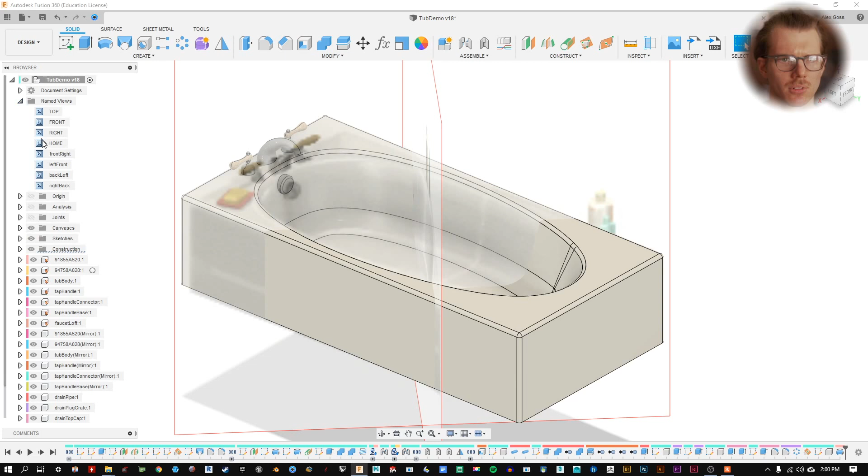Today we're going to think about a few finishing touches for our tub. First thing I want us to do is check out our canvases and just kind of see where we're at. I'm going to open my named views, go to our left front, and I'm going to hide the tub just so we can get a better picture of what's going on. Okay.

There we go. So one thing I'm thinking about is this softened edge. It's really an aesthetic detail, but I want us to think about ways we can do that. And there's not a lot of detail here. I think there's some room for interpretation. And then what we're also going to think about is the function of our tub. This is going to be filled with water.

Even if it's cast iron, it seems a little dubious, especially as we start to work on the aesthetics of these walls. We're going to remove some material here probably. So rather than thickening things, we also want to think about how we can use a little bit of material and then brace this. Now, that might be overkill. Tubs probably aren't necessarily like this. But if you're thinking about hollow, thin-walled projects, it's a feature we can play with, and we'll have a very robust cast iron tub.

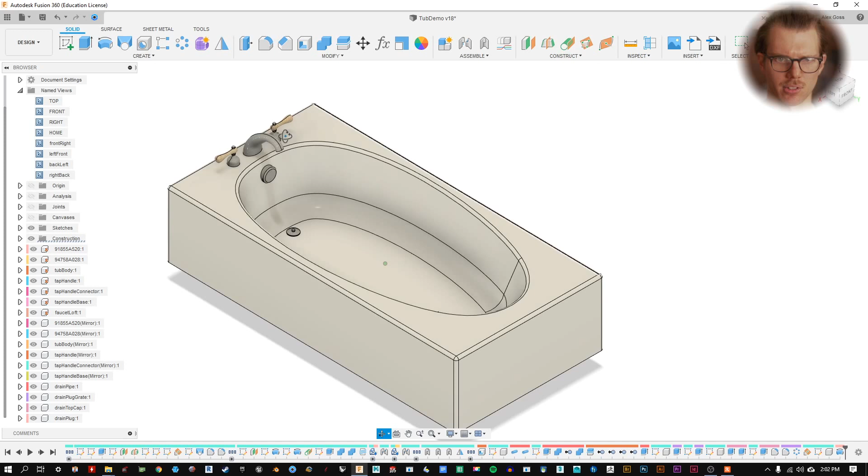And we'll do some filleting, finish that side out, finish the top side, just make sure everything's looking how we want it. And then we're going to talk more about joints. So mechanical joints that we want to focus on at least are our handles, maybe the stopper. I went ahead and finished the stopper after we parted ways last time. We ended about here.

And I just made a simple revolve based on just looking at a stopper. There's a little hand grip there. Pretending that this is the gasket, the rubber part that compresses down. Nothing super realistic. I made them all one body. So not a big deal. We could change that material. Maybe we could just apply that to the face. Doesn't want to do that very well. Well, another reason we could separate it into its own body. We'll go back to our brushed. That's fine. We can pretend it's a gasket, or you could make it its own body

or its own component. When we do joints too, we're going to talk a little bit about how we can simplify our browser tree here. We've got so many different pieces. It might be helpful to have a way to organize it, especially these McMaster components we imported are just part numbers, which is meaningful if we were to reference those back in the McMaster catalog if we were purchasing these parts. But as far as the design of this thing, it's really hard to remember. Is that a nut? Is that a bolt? Which bolt is it?

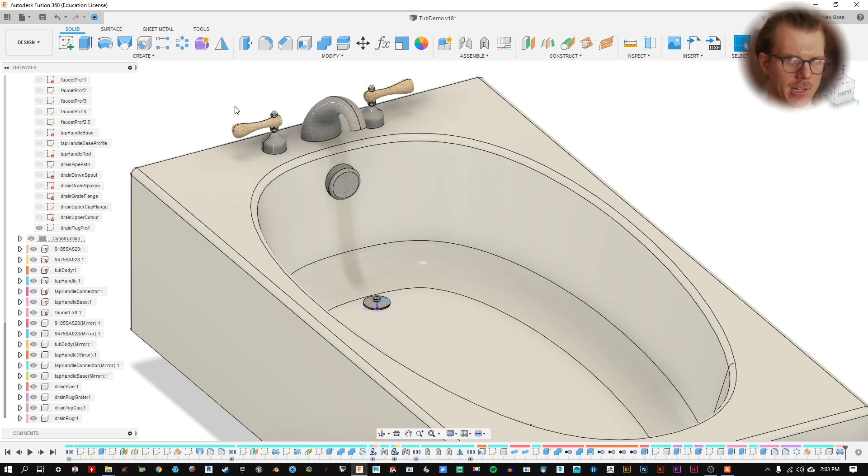Rather than renaming it, we're going to place it closer to its assembly. We're going to think about this whole group here when we work on the tap handle as a sub-assembly to the assembly of the whole tub. So let's get started. Let's open up our canvases, go to a view where you can see this swirly shape. Where the tub's obscuring it, you can hide it. In fact, we might want to hide pretty much everything right now. We're probably going to be cycling on and off the tub body as we start to carve into this. But right now, we just want to think about what we need to do.

I'm looking at this, and it's kind of a wave-like pattern. It starts low, it wiggles, and it gets a little higher up on this side. So let's start with a sketch and just sketch this out, feel what it's going to look like. And then maybe we can think about ways we can turn that into a feature. Just want to make sure my typing is working. Great. So we can keep our canvases on. We're going to need them in a second.

I brought the tub body back so we can see it because we want to create a sketch on this face. So create sketch, click on the face of the tub. I'm going to immediately hide the tub because it's blocking so much of our canvas as it protrudes through. I'm going to start with a fit point spline rather than a control point spline. Just to review, control point spline gives us slightly different options. We want the abilities that fit point spline can do. Again, I'm going to try to shoot for as few points as possible.

And then rather than trying to remember if it's enter or escape to end that line, I'm going to have you just press that check mark because I don't want to confuse y'all. And then when we finish the spline and it is sitting there, we can definitely hit escape to end that command because we're done with it.

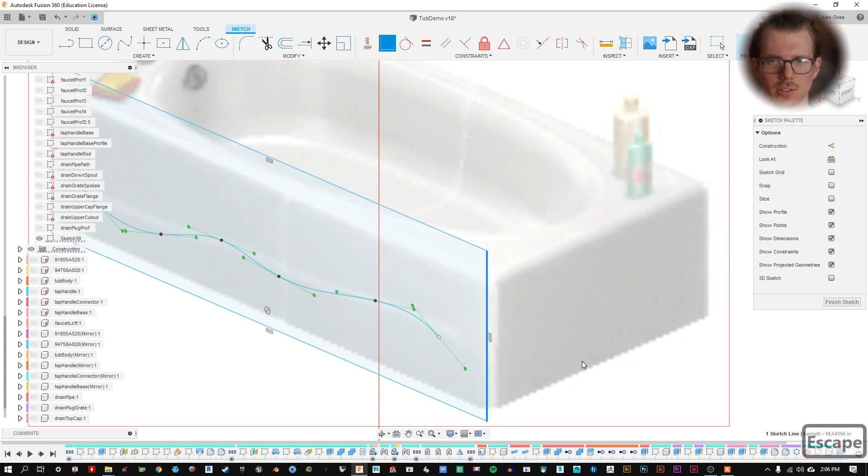Okay, next thing I want to do is I'm going to draw a rectangle just kind of around our spline. And then I'm going to make the ends of the spline coincident to these ends, not walls yet. So make sure I have nothing selected. Coincident, this point, that line, this point, that line. Depending on what you select first, one piece might move to the other piece. Sometimes little decisions are made without us knowing.

Now we want to try to avoid sharp curves. I'm not going to worry too much yet about if our sketch is tangent, meaning if this spline flows perfectly into that rectangle. It'd probably be a nice thing. We can go ahead and try it. This is an example of if we think about what tangency means.

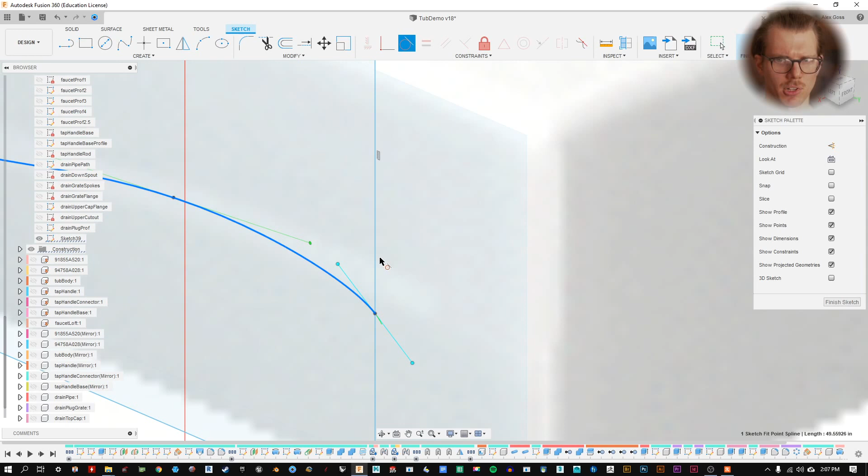Right now, this spline is intersecting, or about to intersect, this vertical, and it could either be tangent this direction or this direction. So if we hit escape, have nothing selected, and we click tangent, click on the spline, click on the line, it's probably going to want to dive that way, and then we're getting this sharp corner because we're thinking about this part of the profile as the part of interest.

So if you're getting that problem, it's probably best to position it close to how you want it, and then do that command, and then it's going to go tangent the other way. Now let's say you do have your spline up like this, and you make it tangent. Can you fix it? You could delete that. Say you didn't notice it at first and you come back.

You could always come and hunt for the little icon. Just be really careful where you click on it, make sure you're not clicking on anything else. And then you could hit delete to release that. Or maybe if we click on the endpoint there, you can grab this handle and we can slide it down the other way. So you're not in the weeds necessarily.

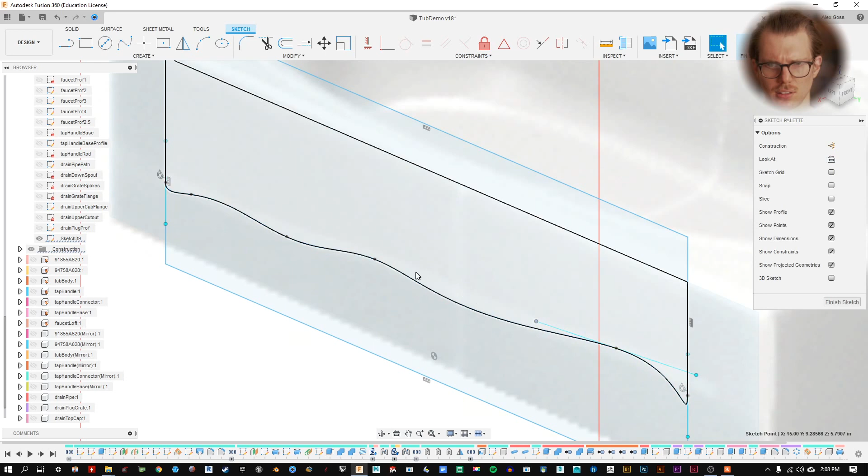So this is open to some interpretation. This is probably an opportunity to just try some things out. Nothing is really sacred here as far as what's right or wrong. This is an aesthetic part of the whole thing and it's not going to necessarily be perfect, as we've seen with the rest of the project, but maybe we figure that out.

It's going to be still kind of a tight turn, so maybe we push this over some more. Bring that up. Maybe this comes out some more. I'm trying to see kind of where that shadow rests. I'm not going to worry too much about this edge being symmetric to this edge. This might not be a symmetric feature. I mean, it already is this kind of amorphous wiggly bit.

So if the distance between here and the end of the tub, and the distance between here and the end of the tub aren't the same, I'm not going to worry about it. You could make those even if you want, but I think it's okay. You could also further constrain this sketch if you so desired.

Speaking of which, let's think about what we really want to accomplish here. This top part is going to be our profile, but we're also going to need a bit that extends above. So really we're interested in both of these.

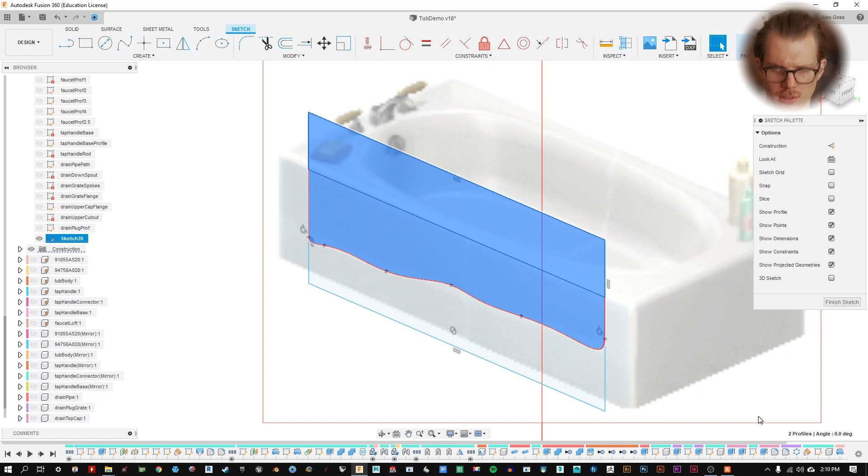And because we were building this on the side of our tub, we're getting this profile built in, this bottom edge of the fillet. We're getting that profile built in because the construction plane we used was the side of the tub, so it's going to use what available edges it has. So we'll have these two.

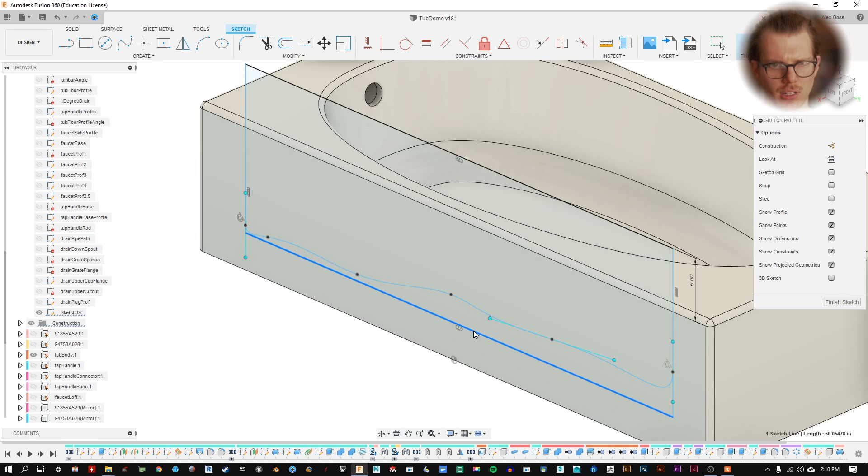The height of this isn't super critical, but we want to make sure it's above this to some degree. I'm just going to give it some dimension. Now this bottom edge is going to be a reference tool. This is going to be kind of our pivot point, the way we're going to end up extruding this out. We want this to be clearly identifying how far we are when we make our pivot.

We're going to think about it in another direction. So we could, let's see if Fusion will let us do a tangency command. I think it won't between these two, this spline and this line, because they're not sharing any points right now. The problem with asking Fusion to make this tangent to this is that there's so many options right now. Because this is a fluid spline with all these different kind of points, it's not really regular. It's not a repeating pattern. Fusion can't decide, do you mean tangent to here or here, anywhere along this. So we would need some kind of connection to that line to limit that.

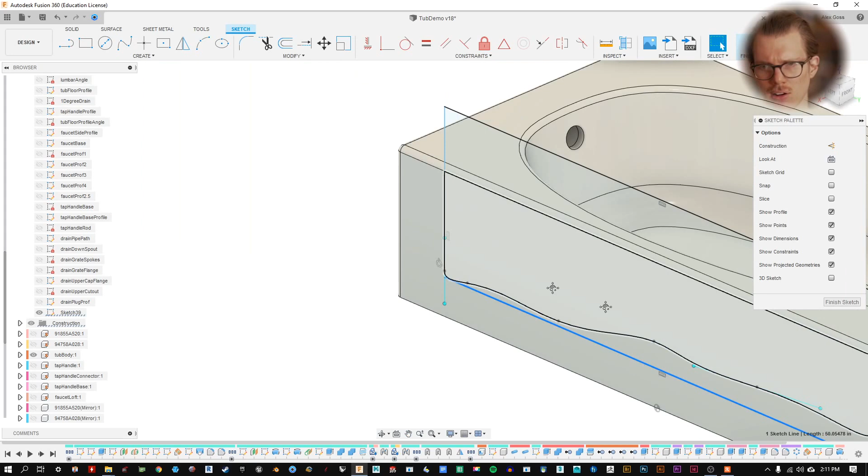I like the way that looks. I'm going to keep that line just kind of where the lowest part of our spline drops to. And I'm editing all of this in this isometric view that we grabbed for our named view, just because I want it to reference the picture. Let's go ahead and finish that sketch. And let's label it, because we're going to be jumping between sketches a lot. Let's call this vertical, because right now it's just on that vertical plane. We're going to tilt it over in a bit.

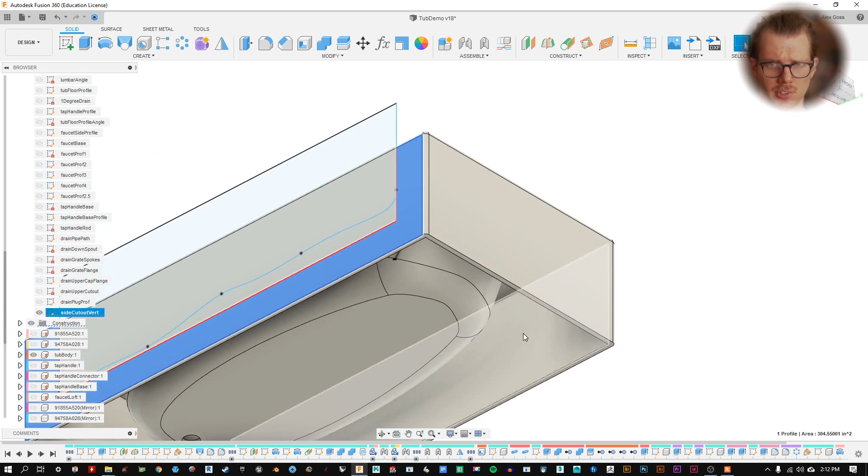Let's make a new construction plane. What I want is a parametric plane, meaning it's going to reference actual features, not just fixed dimensions or arbitrary placements. We've done this before, but we're going to do a new plane between the inside wall of the tub and the outside wall of the tub. This is going to make sure we don't cut too far into the wall of our tub. And if we change that thickness later, it will adjust automatically.

So we're going to start with a midplane, construct midplane. You can click in any order on the inside and the outside of the tub, and there's our midplane. If we look at it closely, we can see it's dividing even that fillet in half. Great. We're going to hit OK. And now we're going to start a sketch on that plane. You can either click on it first, pre-select, or go up to create sketch, then select that plane. Just make sure you are hovering somewhere over that orange bit.

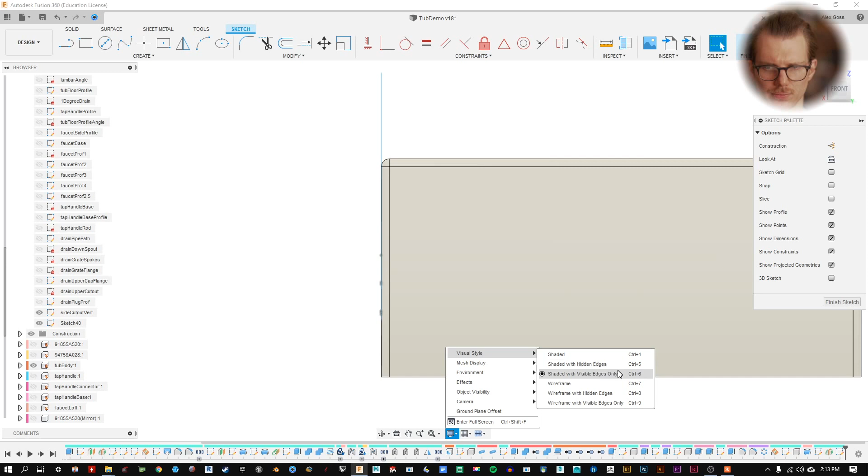That's another reason why I like creating a midplane, even when it seems like you don't need it. It gives us a nice ability to grab at the edges and not have to guess, are we clicking that plane or that plane? So now we're sketching inside of that wall. Let's look down the side of our sketch and change this to wireframe. I'm going to project this bottom line. I'm going to hit P on the keyboard and hit OK. And now we've got this point.

Remember I said this was going to be a pivot. This is going to make sure that the furthest our cut goes is to that depth. And then I'm going to make sure we end up with a nice blend into this top fillet. We're not going to cut into it, and we're not going to cut too far where it's a sharp edge. We're avoiding sharp edges. I'm going to start a line command, starting on that point, and, oh, I'm doing this in the wrong order. Okay, we'll come back to this sketch.

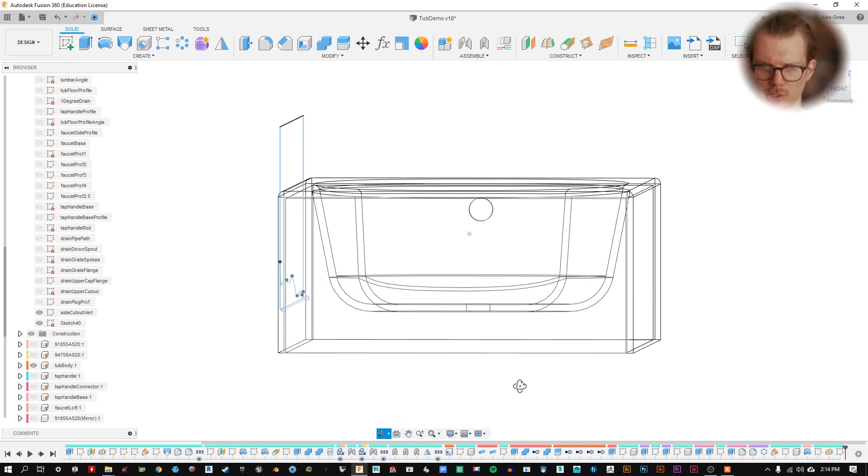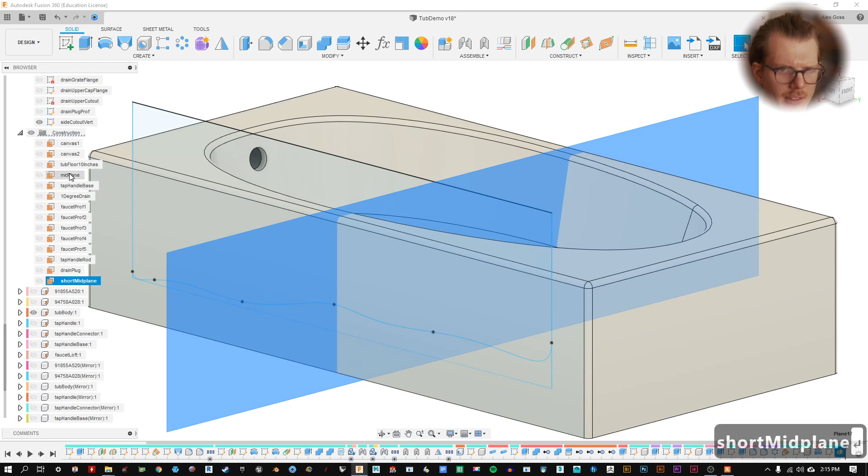So what we should have done, let's roll back a little bit. We don't need that sketch. Let's see, what was the midplane for? Just trying to retrace my steps. Okay, right. The midplane's supposed to go the other way, excuse me. So let's double click on that. And instead of those outside and inside edges, let's make a midplane. We could use the origin, but as I said, let's just make a midplane so it's clear. I'm going to call it short midplane. Make sure that's visible. We'll need it.

Let's start a sketch here. And now we do need to think about the wall thickness, but in a slightly different way. So let's go back to visual style wireframe. We want to find out what the center line is here. We're looking down the side now because we're eventually going to create an angle that looks something like this. I'm just exaggerating it right now. It's not precise, but we'll work on that. So I'm going to delete that. We don't need that line yet. We're going to do something similar to what we did with that midplane, looking at this inside and outside edge. I'll go back to shaded mode.

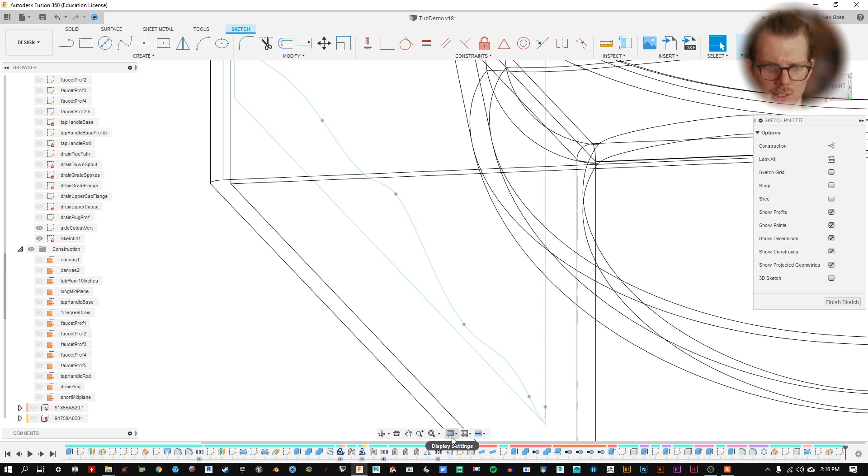So I'm going to project some geometry, hit P on the keyboard. I'm going to grab the inside wall and the outside wall, like what we did with the midplane, but different, and hit OK. I'm going to go back to wireframe, look down the side. That looks right. And what I want to do now is I'm going to draw a little tiny line between these two. So now we've established this thickness.

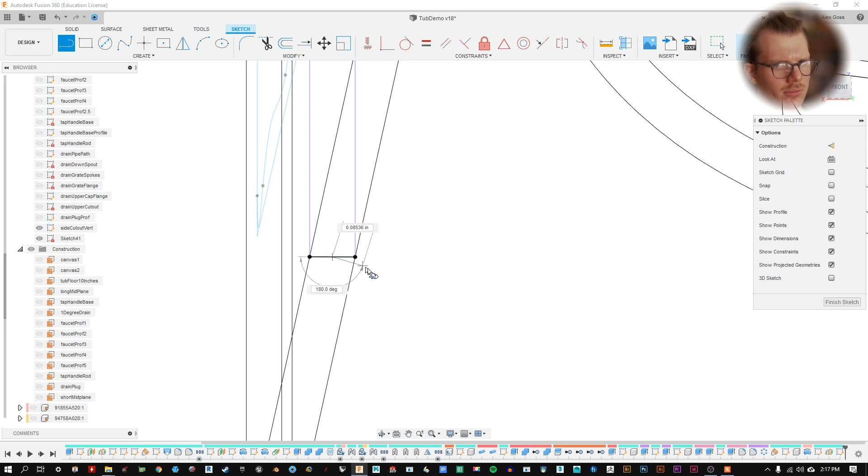And I'm going to draw a center line. And if you don't see that constraint, what I'm doing is I'm starting a new line by pressing L. And I'm going to hover over near that midpoint until it snaps. I get that triangle constraint built in. Okay, I'm going to draw that somewhere up near the top. Doesn't have to be really too far. We can constrain it in a moment. And I'm going to make everything I just drew construction geometry.

Okay, if it's looking muddy with that tub, we can hide it because we've got all the information we need from the tub. And let's make everything here construction by just, with a marquee, grabbing it all and click construction. Okay, this is going to be unconstrained for the moment. But what we're going to do now is find where this point and this point will meet.

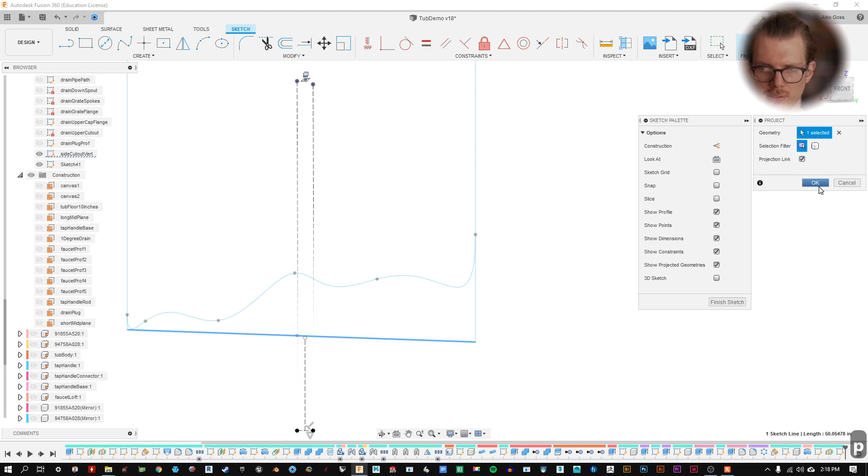So this point is the bottom of our rectangle that we drew as a boundary. So we can hit P on the keyboard and select that bottom line, hit OK. It's just going to give us a point where that intersects our verticals, the outside wall. And let's draw a line between those two. So what we're about to constrain is that height. So projecting that just into the center of this tub so we know where to start in our up and down.

And let's make this horizontal vertical, or you could make it perpendicular. Show you that again. We could make this line horizontal vertical. I like perpendicular because it's really talking about the drawing itself, not so much relationship to like the origin or what's up or what's down. And let's make this also construction. So select it, construction. Looks like you have to select it first. Okay, now we just connect the dots.

We're looking for the connection between this point and all the way up here. This point, if we bring our tub back, this is where we want that cut to pass through, to pass beyond. So let's do that. Let's create a new line. You can start either direction, 1 and 2. Looks like I'm still in construction mode, so we can hit escape, select that line, and just hit construction again. It'll switch it to feature geometry.

Okay, so all of that was to create a plane. We're going to create an angled plane based on that sketch. So if you want to, you could go back to Visual Style, Shaded, or Control-6 on the keyboard. Okay, we've got two sketches visible. This is our angled sketch, and then our profile that we're going to cut out eventually.

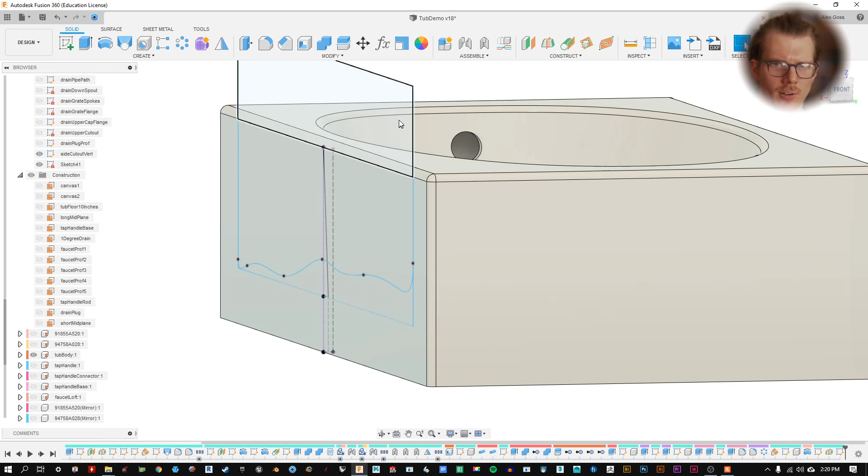So to construction, plane at angle, and we're going to find that line that we just drew, that connect-the-dot line. And we want to make sure that angle is set to 0 degrees because we want to reference that angle and nothing else.

So that angle is really just determined by the length here, this leg of the triangle, and then this leg of the triangle from the tip to where the bottom of our spline ends, and then to the center of the thickness of the tub, which is parametric. So if we scale it, it should scale like I was talking about with the midplane. We did something kind of similar here. So it's parametric. We're always looking for ways where we can tie things to the meaning of the drawing.

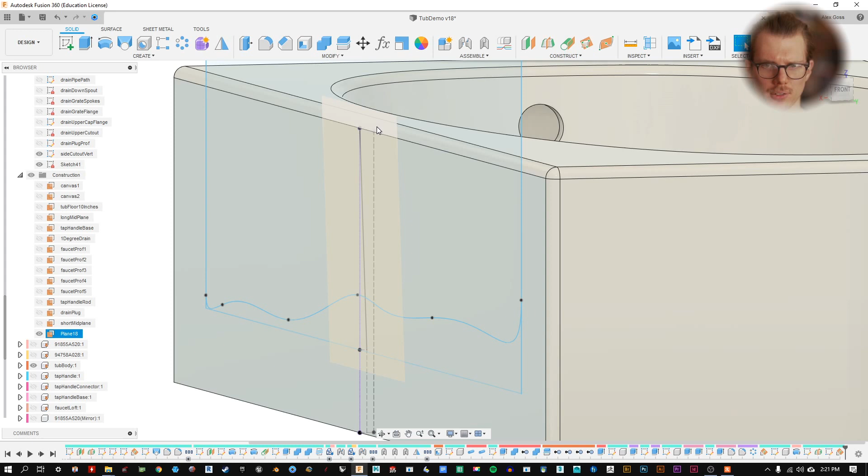Okay, we have a new construction plane. We want to take this construction plane and project our sketch on it. Before we do, let's just look and see what we already have. We kind of want this to go halfway through. So we can do 5/8 divided by 2, halfway through, and then make that negative, so we're cutting.

So right now with no angle, it kind of looks like that. So we've got all these sharp edges. We could fillet that, of course, but we've got just kind of extra bits, even if we fillet that, if we want to look at that.

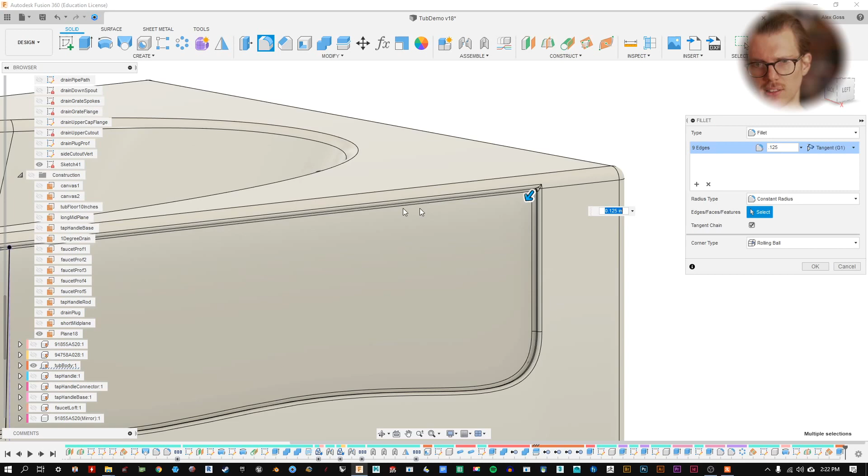Okay, I think that's not maybe the most sightly thing we could accomplish. Like this, I don't know, something about it also doesn't seem as hygienic. This is probably going to get wet; we don't want water to collect underneath here, or condensate. Just thinking out loud. So we're going to project that at an angle, so anything that drains will just drain straight off and not hang underneath the lip, avoiding a lip.

So let's undo that extrude, or just delete it rather. And since we have our angled plane, let's bring our construction plane back. We're going to create a new sketch. Click on that plane. And then we're going to make sure we can see our side cutout vertical. And let's project it. So we can hit P on the keyboard, or you can go to Create, Project Include.

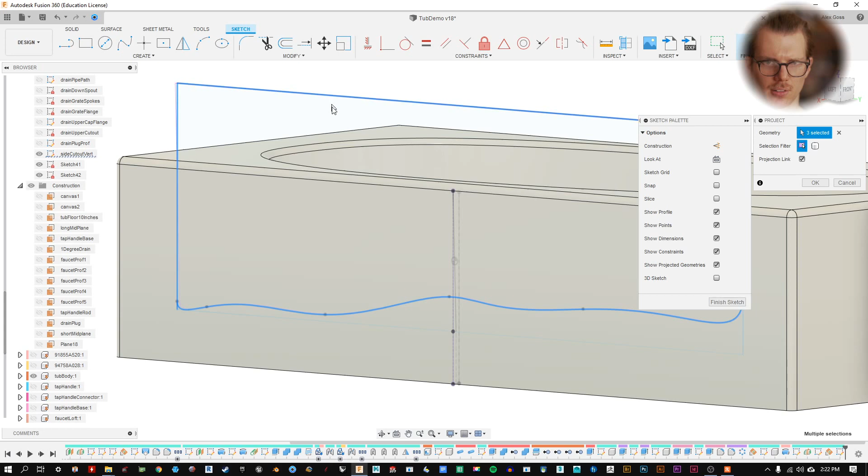And I'm going to take this part, and this part, and this part. We don't need that bottom edge. We could have made that construction geometry. That probably would have communicated that. But there we've got our profile. And we can hit OK, and we can finish that sketch.

So let's clean things up a little bit. I've got my cutout angle plane. You can hide that. Our side cutout vertical, we can hide that. Now we've got side cutout angle. And if we look at it, it should give us kind of a preview of what's going on. So we're really only taking a sliver away. Let's go ahead and do it.

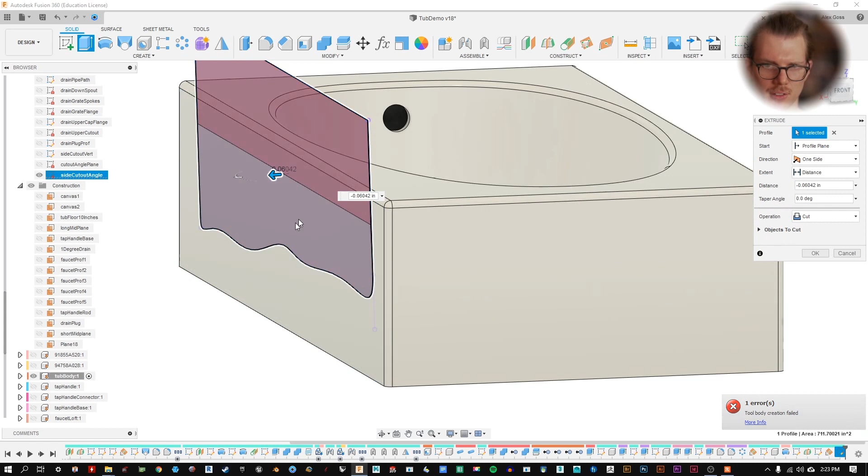So start with an extrude command, and just click that handle and you can pull it out anywhere. Now, we can't really get a good parametric extent here if we make this To Object. I haven't had luck with having it go outside, even if I change the chain faces command. So you're just gonna have to think about distance and just make sure it goes far enough. Okay, you don't want it too short.

So I'm just coming up with a dimension. 1 inch will probably always be okay for however much we change that wall thickness, where it's never gonna be thicker than that. Okay, and there that is. That's kind of a little more elegant of a shape. Now, we've been talking about water collecting, and sharp edges, we want to remove that. So right now we've got this sharp edge here and this sharp edge. We also want this corner to blend nicely.

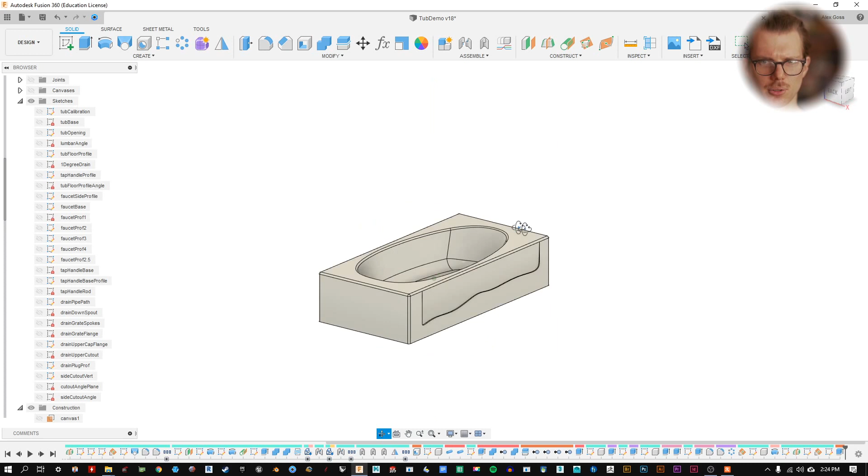Before we do that, we want to think about, from our canvases, this has got that feature on both sides, which maybe isn't realistic for the tub. But maybe it gives you an option to orient it left or right facing. So let's pattern that. We can mirror it, but I want to try something new, kind of thinking outside the box, a way to kind of mix it up. We could mirror this and it would just be perfectly identical. This side would be on here and this shorter side would be over here.

Let's try something else. So let's go to circular pattern. If you don't see that up here, yours might be under Create, Pattern, Circular Pattern, and I've just pinned it to the toolbar because I use it often. And instead of pattern type components, let's go to features. For objects, select that last extrude we did. And our axis, we don't need to draw a new one, we can use our origin.

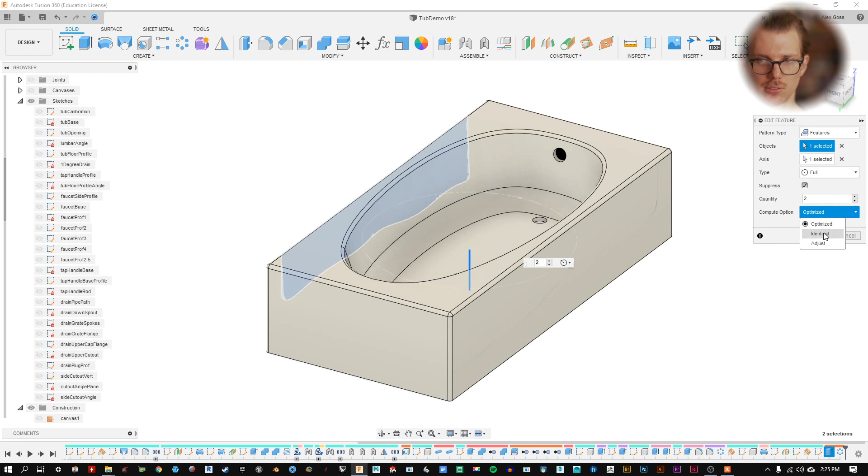Okay, it might look wacky at first. The default quantity is set to 3 right now on my machine. If I make that 2, you might not see anything. We can try some of these different patterns. It looks like optimized worked for me. Sometimes you get some failures when you try these things. There's another reason I didn't fillet it before. We could have softened those edges and then done this pattern, but I find that when you start to fillet things and then pattern them, things just get disconnected and kind of lost in that translation.

So now you can see the long edge is on this side, the short edge is here. So it just kind of makes it seem a little more organic without having to redraw it. So let's do our fillets. I'm gonna make sure I just have regular fillet. We can talk about rule fillet one day, but I think right now fillet's gonna be simpler for what we need to do. And I'm just gonna select these 2 edges.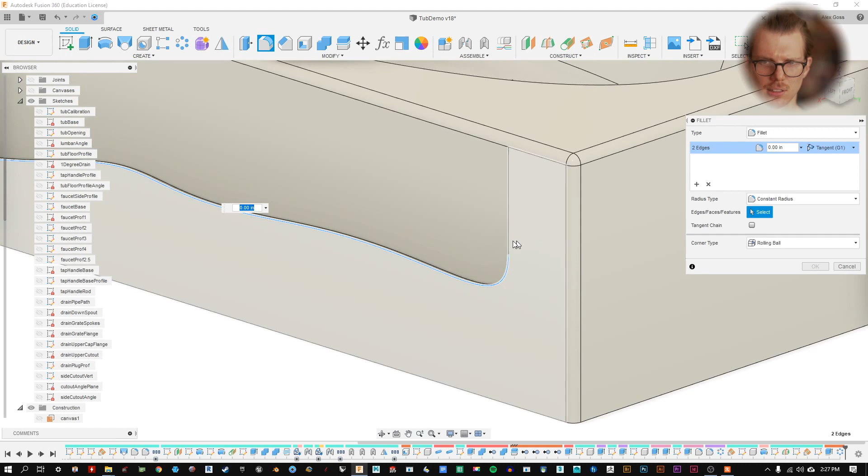I have this tangent chain selected. That lets me just click anywhere on this edge and it's going to find anywhere it's tangent and automatically connect it. So since we made our spline tangent when we started off, it automatically connected that. Otherwise, if we didn't have tangent chain selected, we'd come in here and we'd click, and we'd click. It's just more clicking. So if you hit tangent chain, it'll automatically grab that. And we should be able to do this in just 4 clicks.

This is one of the situations I would be careful grabbing this handle. Let's start off by just typing in some numbers. We know the thickness, or we know about how deep it is from here to here. That's gonna be half of 5/8. So we can say 5 divided by 8, divided by 4, I'm sorry. Okay, but that seems to work perfectly.

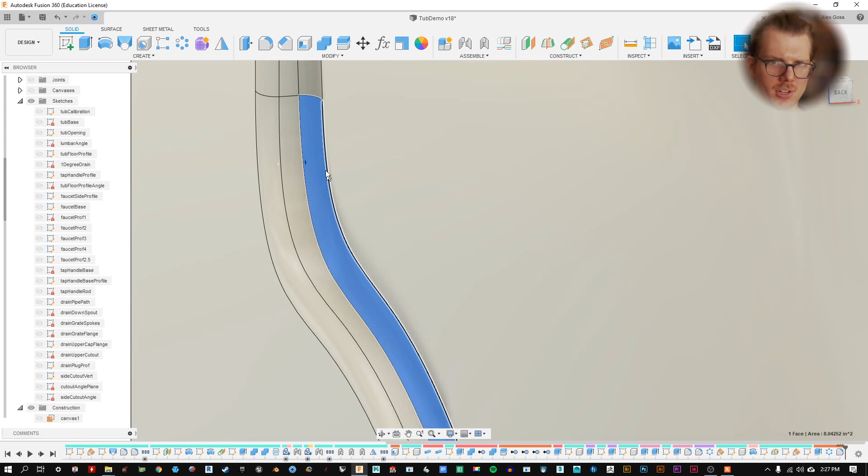If we made it smaller, which we certainly could, I don't even care what decimal it is, but let's just say we can make it 0.1. And we end up with a flat somewhere in here. So we're transitioning this concave fillet, and then we have this flat portion, and then we have this convex fillet.

I like to get away with as big of a fillet as possible, and I'm just thinking about how this was built. This isn't parametric the way we're typing it in. There's a way to do it, but it's kind of advanced. We'd be using our parameters up here where we can define certain things numerically. We can talk about that in a later video if folks are interested. But we've got fillets on both sides. That looks great.

Okay, let's look underneath the tub and let's think about reinforcing this. So under Create in our solid features, there's a couple of these features we haven't talked about. We've done some extruding, revolving, sweeping, lofting. We've even done thread, we may have done hole, and we've done some pipe. But we haven't looked at rib or web. They're very specific to the plastics industry.

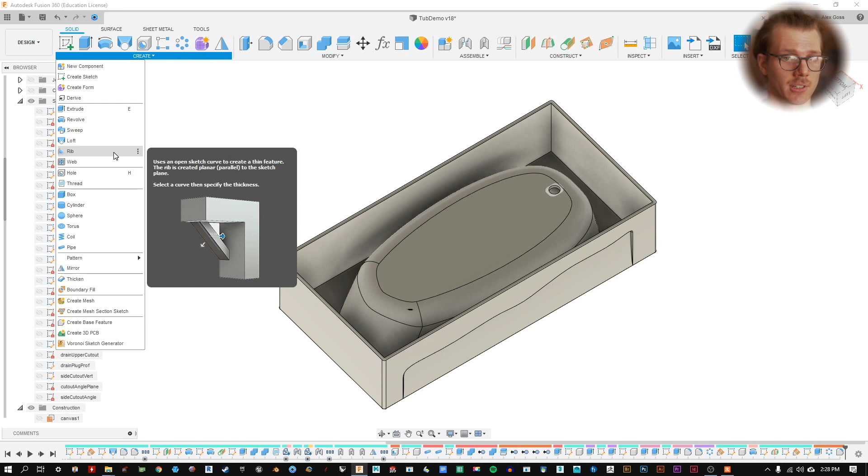If you look at a lot of things like a cover to a device, if it's plastic, it's probably injection molded, and it's probably got these ribs and webs underneath to keep that product thinner, so that when you cast it, you're not only using less material, but you don't get warpage or shrinkage as that material cools. If it's an even thickness everywhere, you get strength without making the thing solid. You save material and make a more precise form.

So rib is when you have these overhangs, create strength without making it solid. And a web is what we're thinking about today. We're going to add these ribs that go down the underside here. So what do we need to use this command? It's one of the simplest I can think of, and does a lot of things automatically. We could extrude some sketches, but I'm going to instead just create a sketch. I started that sketch just on the base here, not necessarily the origin, just in case things change.

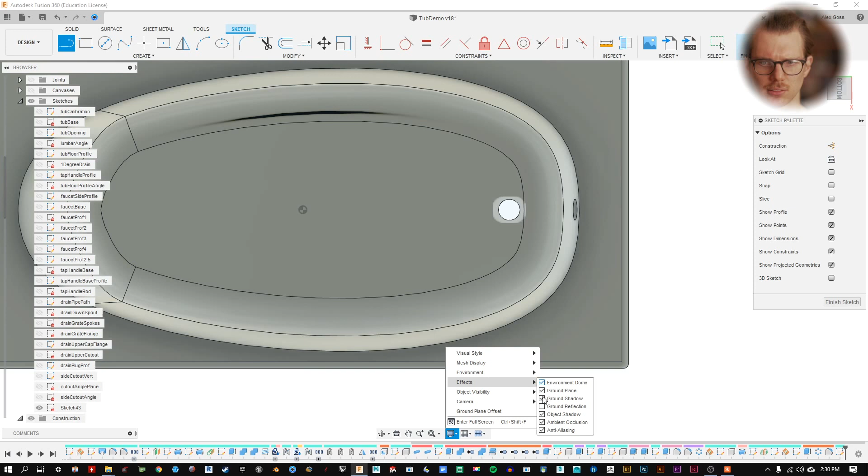I've clicked on that. Let's look at this straight on. Let's start our first rib, or first web. If you're having trouble seeing, I could turn off ambient occlusion, so we can see a little better down here. So we're still in our sketch. We've got our sketch palette active.

I'm going to start a new line, and draw it somewhere between there and there. I just want to make sure this is perpendicular. These two lines are parallel. It's going straight across. We don't want it blocking any of our plumbing, so we want it plenty far away from that side. Let's dimension this out. Let's call it an even 13 inches. Cool. I'm just going to draw one right now.

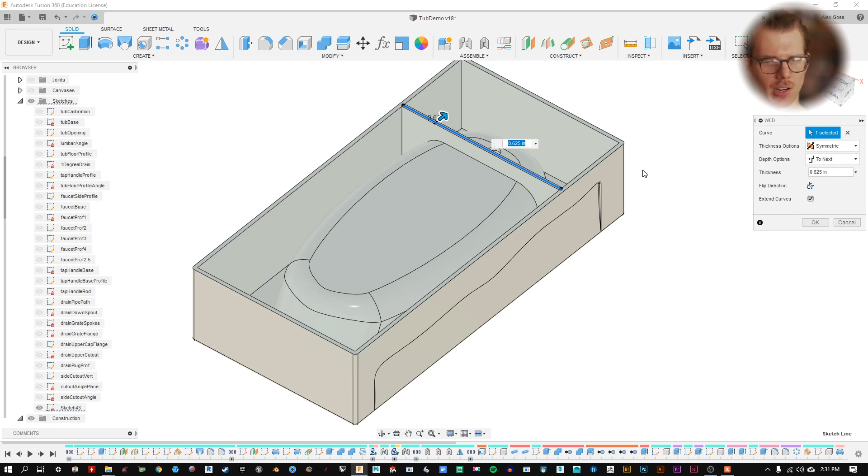Let's hit Finish Sketch, and go to Create, Web. I'm going to select this as the curve, and automatically it does a lot for us. It's very smart; it's meant to just do one thing. It's looking for where we started our sketch and the nearest object it can extrude towards. Now, did it go all the way through? No, it stopped before it went to the other side of the surface. So exactly what we need.

Let's make this the same thickness as our shelled tub, 5/8, and hit OK. And that's it. I'm going to save this. We've done some good work today.

And let's mirror this. Or rather than mirror, let's pattern it. So let's take features as our pattern type, find that web on the history. Our direction, we can set to this axis, but I'd rather do it off of the object itself. Just some line that's going this direction.

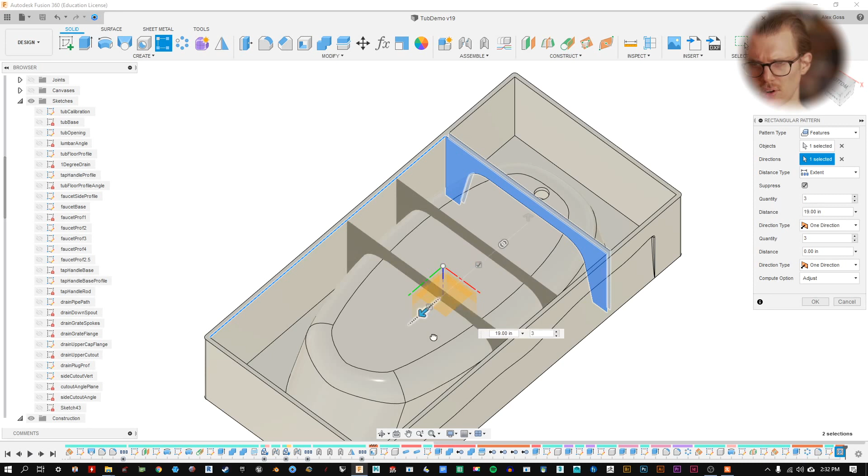And by default, it's going to start off with 3, and I can just click and drag to see how far those go. And you can set either the distance, how far from one object to the last object it goes, or you can change the spacing. So you can see with 3 objects, if we have a 30-inch total distance, there's 2 spaces between these objects, so they're 15 inches apart.

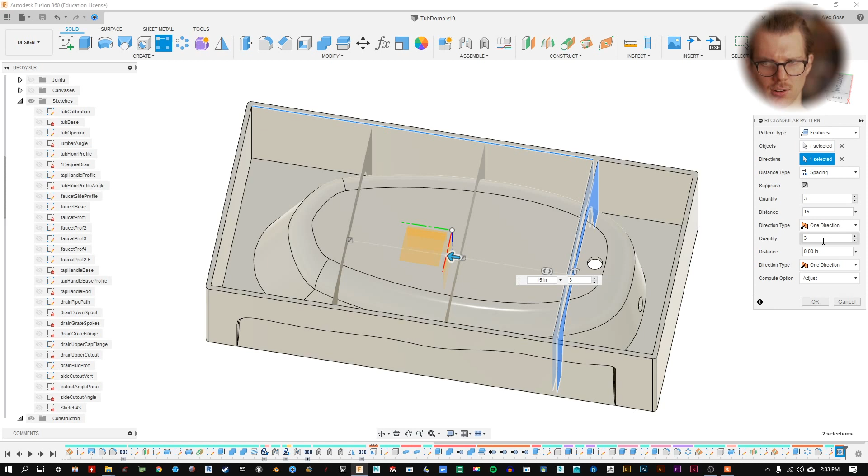We could change that to 13 just because that's an arbitrary number we used earlier. Let's go ahead and keep it 15. That seems pretty solid. And by default, it'll also give you quantity in the other direction. I found that you don't have to change this. It's not actually going to create 3 more things, but if you want to, you could just have 1. And we can hit OK. So there we have our ribs.

And we've talked about filleting the inside because if we're making a pattern for this, or as it's being cast, it's good to have soft edges there. So you could select all these edges if you wanted, not the face but the edges, and it would probably take you a while. But sometimes selecting the edges is a little more particular, a little more accurate, because you can really get what you want and not have extra bits.

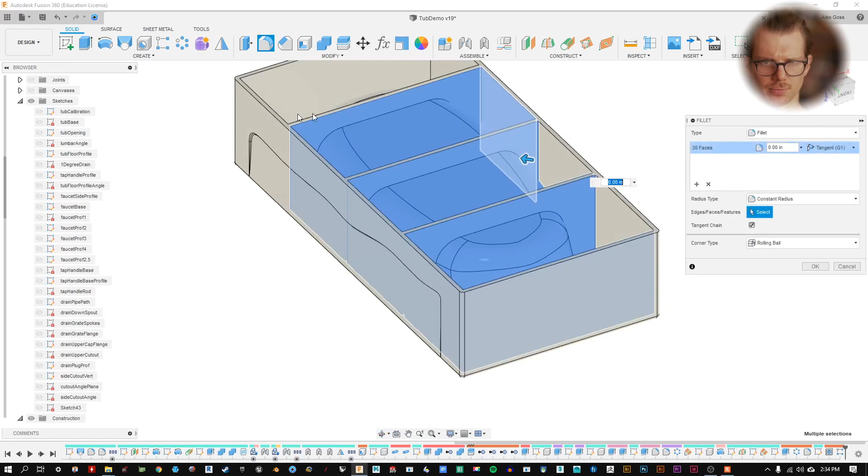Let's save some time and fillet these faces. You could do one cavity at a time, but I'm going to go ahead and do all of the insides. So a lot fewer clicks than if we were selecting those edges. It's true. Okay. Let's make this, I think we had a 1/2 inch fillet for this part. Let's just make that 1/2 as well. It might not be the most optimal. Looks like we're having an issue with it. Okay, looks like a 1/4 is working.

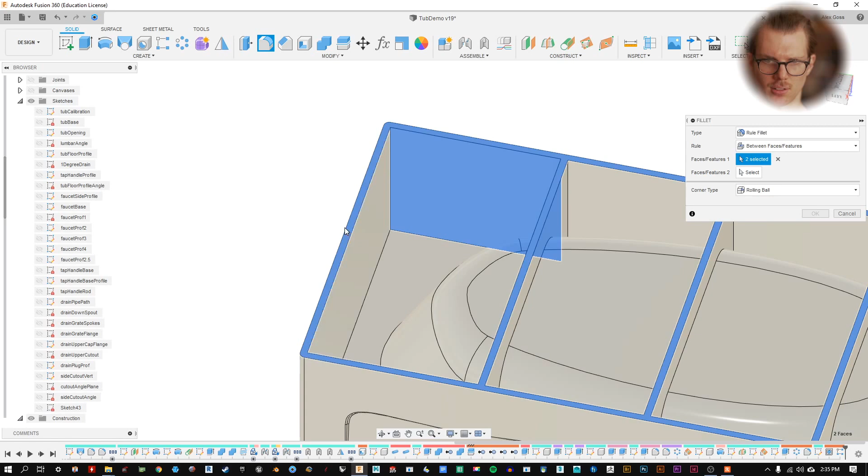Ah, I see why. So because we selected those faces, it's also trying to fillet the top edge. We don't want that. So this might be a situation where we could try a rule fillet and say between faces and features. And let's just try it over here before we click on all of our creation. Okay, I don't need to select that face because there's no material that will touch it. Let's have face features. Let's have the walls. And this part as they touch this part.

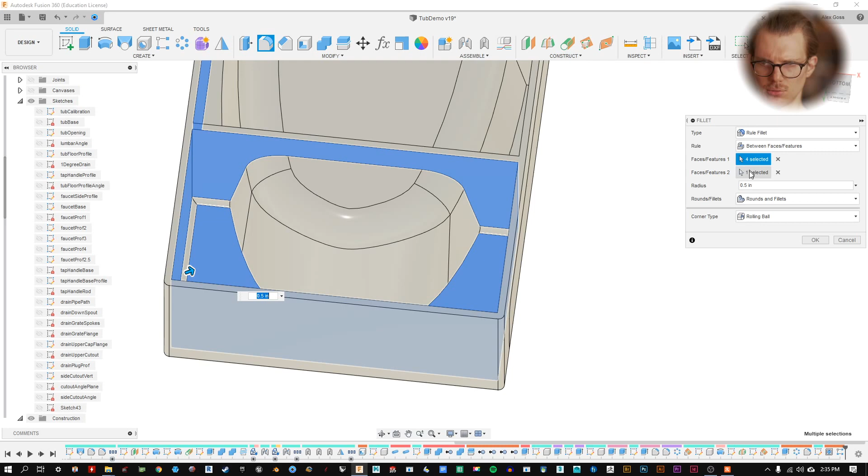Might be worth playing around with which of these you select in what order. Kind of get a different result there. But then we still want this edge. So we could try all edges. Okay, and it looks like that was the right recipe. We can see we've got all of those. I'm gonna go ahead and hit OK on this so we don't get a super crash. Okay, it's also taking that top edge. So let's see if there's anything we can do to keep that.

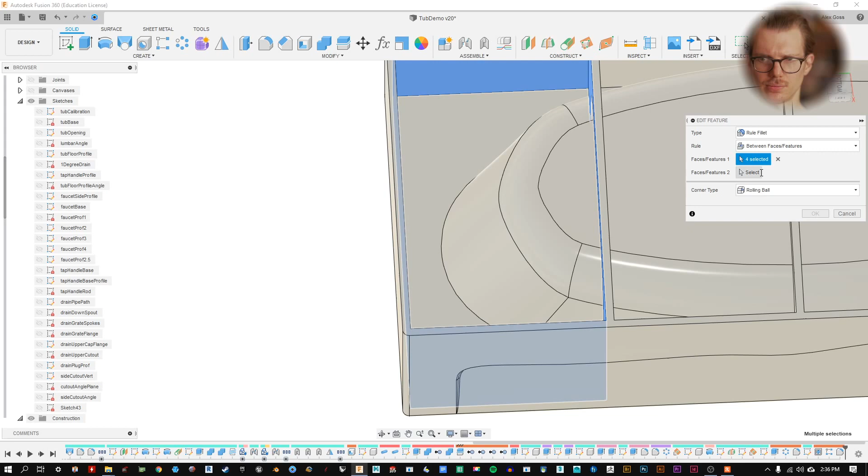Yeah, I think between faces and features gives us the most control. So a rule fillet is a way to kind of think about what you're limiting this feature to. Whoops. So we can tell it to avoid that top edge. Now, if you're having trouble selecting things, hold down Control or I believe Command on a Mac, and that will let you continue to select. We can come back and fillet this later, I believe. Let's just try it. I'm going to go back to just regular fillet and select that edge. See if we can type in 0.5. So that works great. So I think the way to do this is the first step.

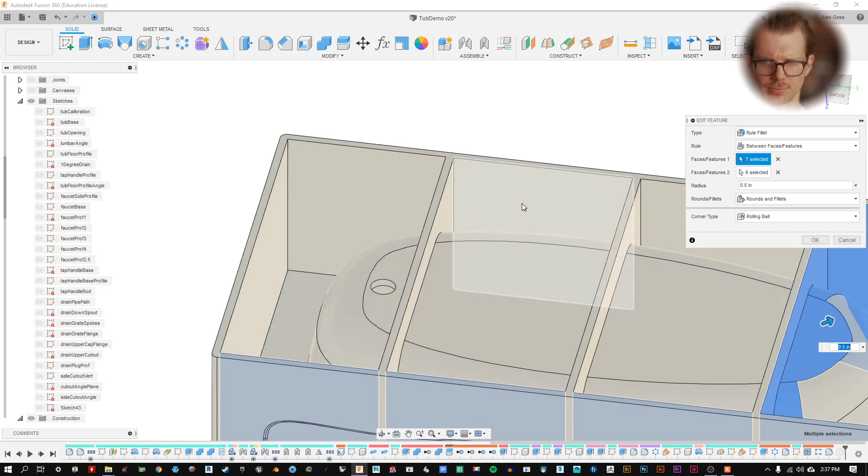Start with the walls for our faces features 1. Holding down Control to select multiple things. And face features 2. Looks like the floor is already selected for us. That's kind of interesting. That actually looks pretty helpful. Let's not forget these interior parts of the walls.

I can tell Fusion's ready to call it quits. It's getting a little tired here. Didn't like that. Okay. Maybe we got to do one pocket at a time. Okay, I think you guys understand the filleting process. We can do that off camera at another time.

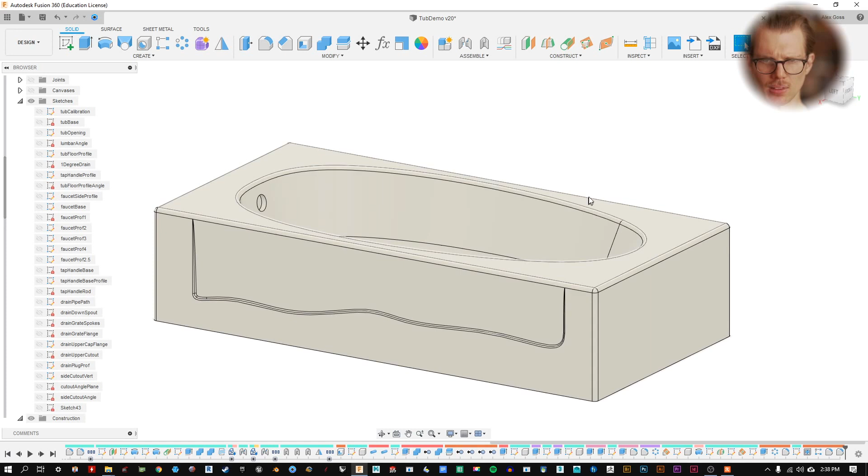And in the last portion of this, let's bring back our components. I'm going to hide our sketches, our construction planes. Let's bring back all of our pieces. And let's just talk about where we're at with the constraints of this object, what's locked down, what's able to still move, fly away.

And then if we want to think about the important features on here that we want to move as if they would in the real world, just to check the distance of things or how things could look at different angles, or just for fun, let's add some mechanical joints. So I want to go back to where we ground everything. Remember we have this little thumbtack icon, a red thumbtack icon next to all of our components. I think I even named that component ground, and I even said the date.

So let's grab our history marker, and I'm going to delete all of these. At this stage, you could also right-click and say unground, but notice it makes a new feature, which is just more that the computer has to process, more that you have to process when you're looking back at history. So I'm going to select everything and hit delete, except for the tub, which I'm not sure which one that actually is there.

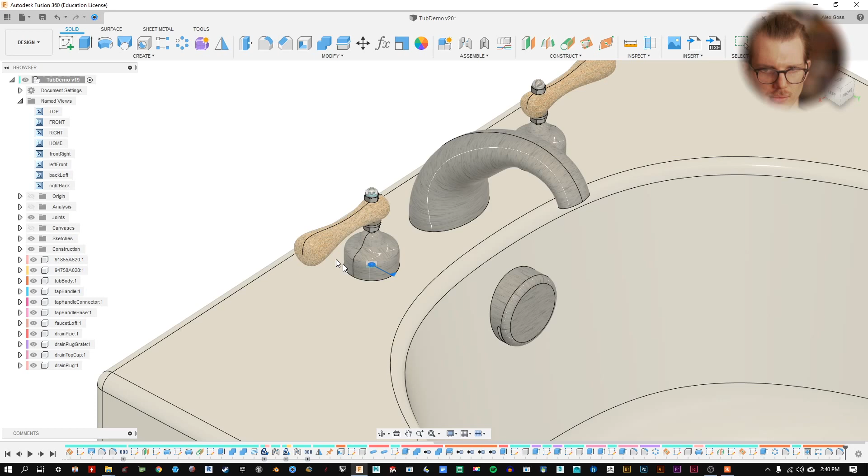I believe it was just connecting the screw to the two nuts. I think that's all we did. When we imported this from the McMaster website, we just made sure when we placed them, they were placed somewhere meaningful and not arbitrary. So we went ahead and made a rigid joint between the nut and the screw and this top finish nut and the screw.

What we want to do now is we want this to be able to rotate. So how do we do that? Right now our handle's free. This is kind of its own little assembly right now, and then this is free. So let's make an as-built joint between the handle and this pivot. Let's go back to our tap handle base. We're gonna hide this because we just want to think about these pieces for now.

An as-built joint, component is the handle and the connector. Rigid is fine. We want it to not move, as if these are tightened down or glued together. That's perfect. And now if we click and drag those, they're free to fly around. Now I'm going to bring our base back. And let's do another as-built joint.

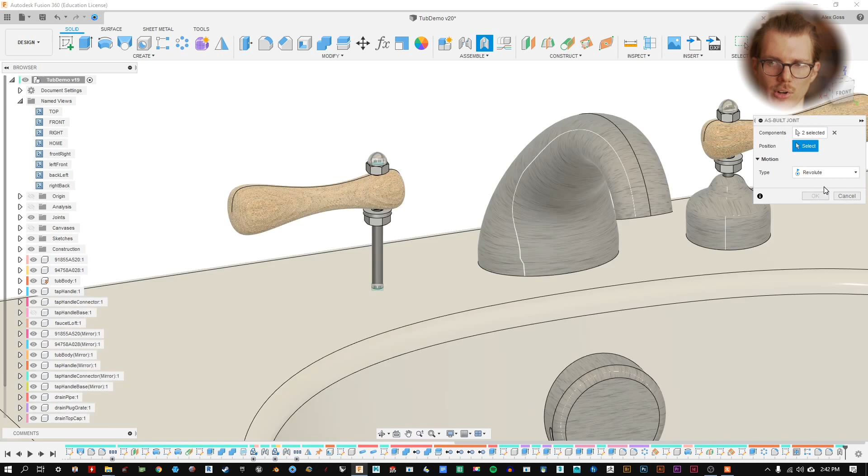So an as-built joint rather than a joint is saying wherever these things are, since we built these in context in the place that they're going to ultimately be, we're not changing or translating the location of something. So an as-built joint, I'm gonna start with that base. I'm gonna hide the base, it's still being used. And then the other component is going to be that rod, that connector, but we don't want a rigid joint. We want a revolute. So this is a motion joint. This gives us the ability to pivot around something. There's lots of different ones here, definitely worth exploring.

What it does when we go from rigid to revolute is it's looking for a position. So what is the axis of rotation? I can hover over this rod because it's built from a circle. It's gonna automatically suggest that that might be useful. We could also maybe use the nut, but I like the cylinder the best. So if you're just hovering here, hold down Control or I think Command on a Mac, and you get these kind of coins.

Whoa, we lost it. Okay, it's a little hard to see there. Can we see it here? Yeah, sort of. So I'm hovering over that cylinder and we get it to snap right there. Maybe we can see it from the top. Oh my goodness. Some of these objects are maybe obscuring our view, so let's hide some things.

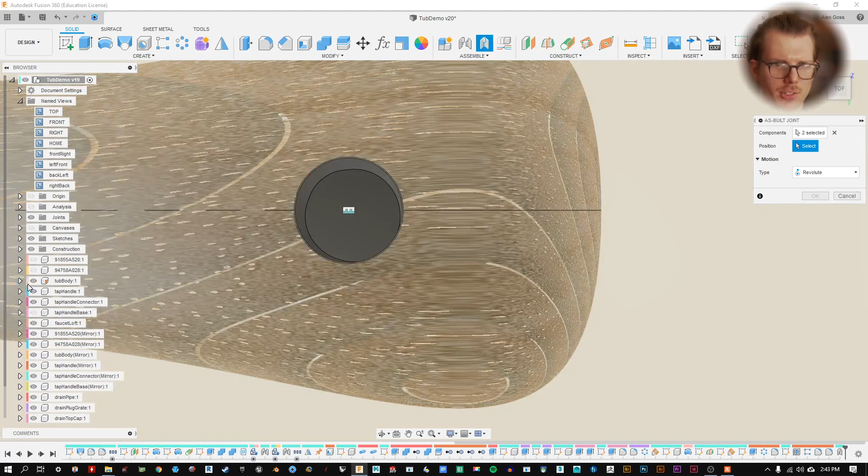Okay, basically when we hold Control, it's going to find a point on the cylinder that's relative to that axis. Let's just make it at the bottom. That's the simplest. Long story short there. So when we animate it, we might not see the right thing move, but let's not worry about that yet. Let's see these joints around the tub. Yeah, let's do it here. That's fine. So this is able to kind of fly around.

I'm going to undo drag component, or you can hit revert. And let's make another as-built joint between the base and the tub. It's not going to be a revolute. We want this piece to be anchored and the other piece to pivot. So let's make that a rigid joint. If we click OK, now we should be able to turn that handle.

That's pretty cool. This is why I like to do these things before I build them. If I'm going to build this object, it would be sad if we found out that that handle, if we really had a lot of water that could come out of this and we had a long kind of throw on that handle, could potentially collide with the faucet. So we could change the position of this. It might not match the drawing. Maybe the drawing was kind of ambitious, but something about that just seems risky.

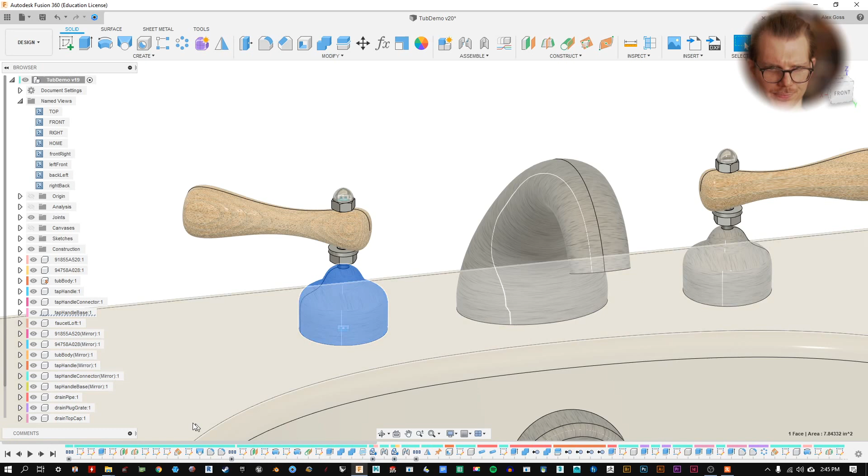So we could go back and find our sketch where we drew this. And maybe we could make this something shorter. Maybe we could make it 9 inches and hit finish sketch. It's going to rebuild it. It might take a little while on your computer as it's processing all this information. Okay, things got a little screwy, huh? Okay. Interesting. Let's see what that's all about.

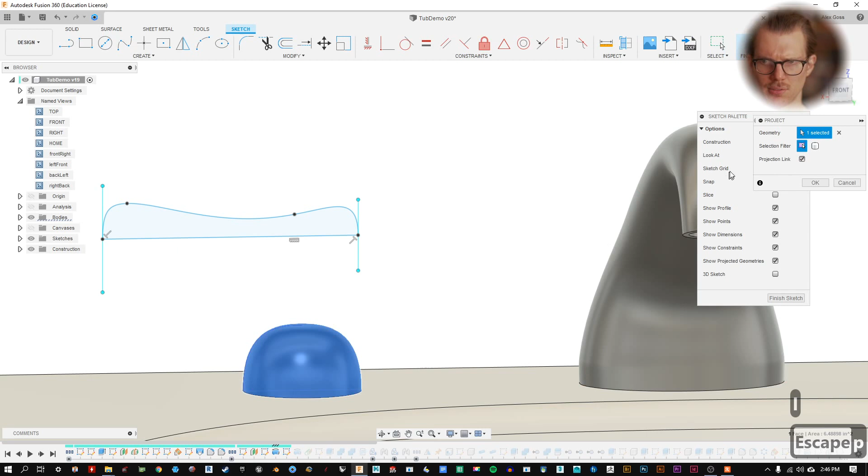I think the first issue is our handle. Yeah, we changed position there, and since those aren't constrained, this might be a time to think about the constraints so that it would move, but we wanted to make sure that the top was over there. We could go ahead and do that, I guess. Project some geometry off of this dome. We can change that selection filter to the body, and it should give us a place where we can grab some center of that bell shape.

Let's make all of this construction because we don't want that to change our revolve that this is ultimately going to be. And let's give this some kind of dimension. Works for me. I'm also going to dimension the length of this. So we're just constraining this. That means they can't change so much. Now our spline can certainly change. We could change the shape of this thing. You know, that's not constrained.

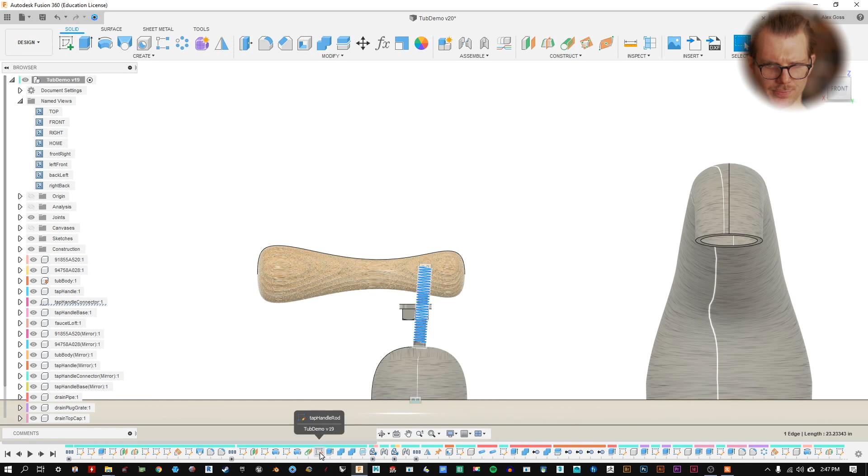We also want to constrain how far up and down it can go. So let's use D on the keyboard one more time to do this. Dimension out. You can make these more round numbers than these, but I think they're fine. Finish sketch. See when we rebuild here what is going to happen. Still a little strange. So let's go back to where we made our tap handle pivot point. So this has to do with how we built that construction plane.

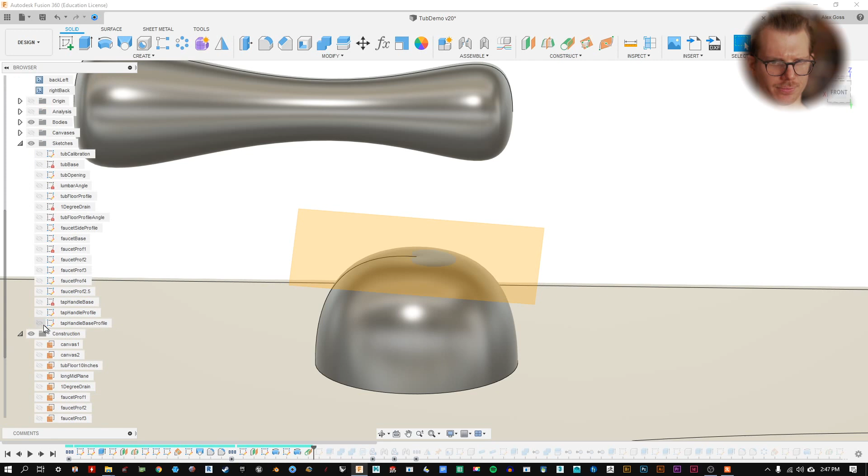So if we make that visible, this was tangent at a point. So tangent and then that point. That point is now no longer centered for some reason. Maybe what we could do is make this sketch visible. That's very interesting. So it looks like the problem started from our tap handle base sketch changing. This is what happened. Aha, because we no longer have that bell shape.

So again, hard to constrain splines. We could try to dimension these points out. Okay, now we're looking a little better. We're just kind of problem solving here. This is how this goes a lot of times. That work we did before with that midpoint is gone now. So if we click, and we might just have to delete this sketch and start over. I'm going to try clicking on that point and hit delete. Looks like it's not going to do it.

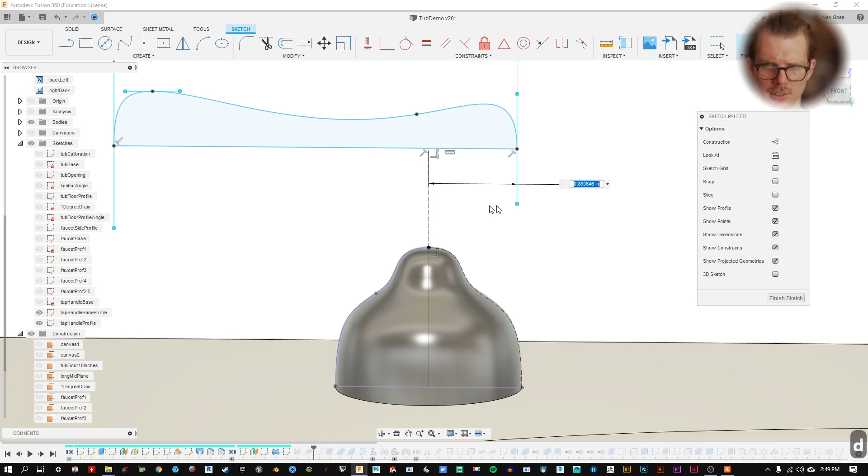So let's make that just one more time. Make it construction. You can hit X on the keyboard or go over here and click construction with that selected. And I'm going to dimension this and dimension the height. Just cross our fingers. We can hide that. I'm going to drag this just a little bit forward in time. Okay, it looks better. So we can bring this up some. Oh, excuse me. Just make that look like it's really kind of biting in there. Let's also make this one come down a little more.

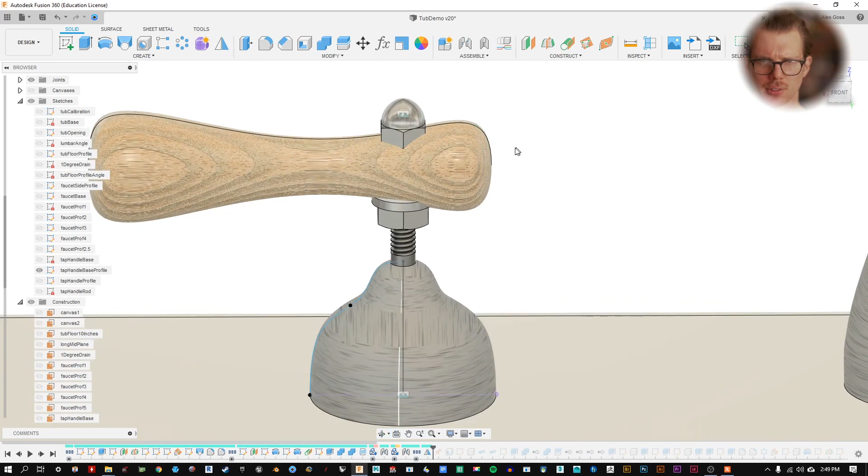This could be a time to make a counterbore on this handle, but let's go ahead and figure out our joints and mirroring it. Because right now we've got this piece over here. All of those changes updated when we mirrored, all of those movements and things. When we go to the end, it's going to take a second to compute all those changes. With our swinging handle, let's see if it clears. This is kind of the moment of truth. Okay, we got plenty of room. We could probably even come back a little closer.

We won't tempt fate today. We can try it afterwards. But we can see that's clearly flexible. With a little bit of tuning and a little bit of rebuilding, trial and error, you can make this thing a pretty solid model where you can change those dimensions. Should be fine. Okay, we're at 2:50. I'm going to try to wrap this up quickly, but show little things that can go wrong.

So we made these over here after we mirrored, so maybe that is why we're not getting these joints. Okay, these two, nothing is connected anymore. So let's go back to revert. I'm going to delete this mirror here. It shouldn't affect anything on the timeline because that isn't referencing anything else.

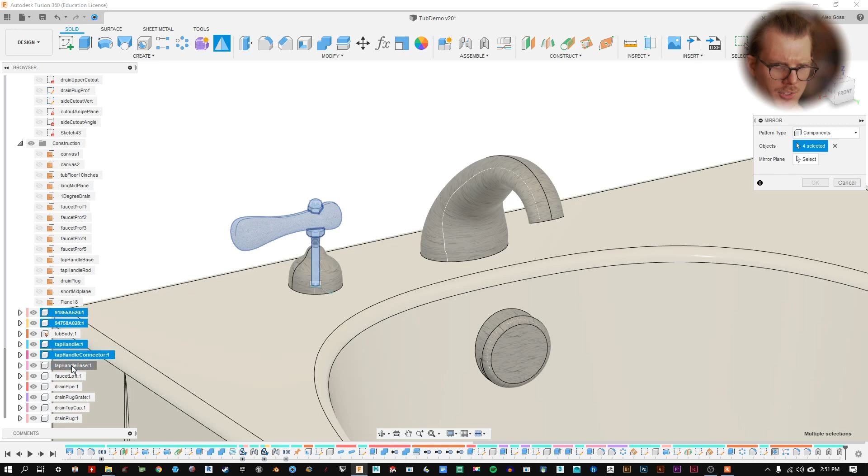I'm going to hide that tap handle profile. Okay, we're all the way at the end, making sure I'm just clicking forward in time. And let's do mirror, components. Scroll down here, we've got our big old mess of components. And we can click on all of the tap pieces. So we've got 5 pieces there. Our mirror plane, we can make the origin or our longitudinal plane.

Click OK. So notice we don't have any of those joints. Those joints didn't pattern for some reason. Something that Fusion doesn't make super easy, it turns out, or as straightforward. We can do it. It's just going to take a little bit of cleverness. We also know that we want to organize our browser a little bit. So I'm going to right click, delete this mirror. We can come back to it.

When we're at the end of our timeline here, let's make this a little more organized. We're going to make this into a subassembly. We can hide some things. Let's right click at our top here where it says tub demo, whatever the name of your file is. It's going to be the uppermost component, and make new component. Let's rename this. Rename. Maybe we could just click on that one more time.

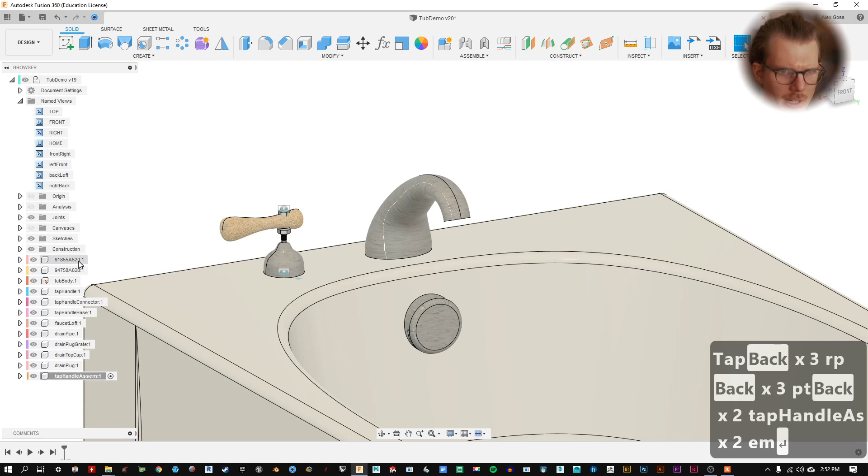We should be able now to drag each of these pieces into that tap handle subassembly. To prove that they're together, we can try the eyeball and see if they all go away. And notice this icon change. I'll go back in time. So right now, this icon changed from tap handle, where it's got just this cube like the rest of them. And we go forward in time, this icon now looks a lot like this icon. So it's an assembly within an assembly.

Because this whole drawing is one assembly of all these different bodies and components and geometry, canvases, joints, all these things. So the joints also traveled with that into this subassembly. That's encouraging. Notice what happened to our history. Did we end up losing all of our work before? No reason to panic yet. This radio button is next to our tap handle assembly. It's the active component. If we make our tub assembly the active component, now we get all of our history back.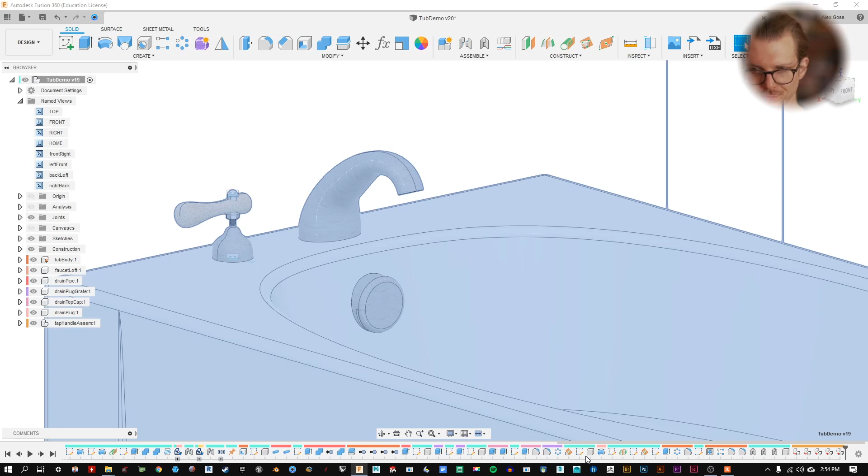Now, any features that built this before we turned that into its own subassembly are still going to be on the timeline when it's in this mode, because we haven't made it into a subassembly until the end, which, depending on how you're working, might make more or less sense. Here, it's gonna work out fine. Turning them into a subassembly, it looks like a cut and paste, but it's drag and drop. Nothing's been really changed permanently. That's what we always want to make sure.

So let's try our mirror command now, after all that work. So now we should just be able to select, when we have pattern type components, just our tap handle assembly, and our mirror plane. Let's just take that origin. Looks like we can't grab it. So let's take our long mid plane. Get a nice little preview and click OK. I'm not seeing any joint icons. If we click and drag, the whole thing moves.

Okay, it looks like those joints didn't translate over when we mirrored it. Let's open this and just see where we have our tap handle assembly mirror. No joints. Okay, that's frustrating. I think Fusion should fix that. But there's a way to do this. Okay, let's see, we got 5 minutes. Let's pattern this in a different way that will still mirror it.

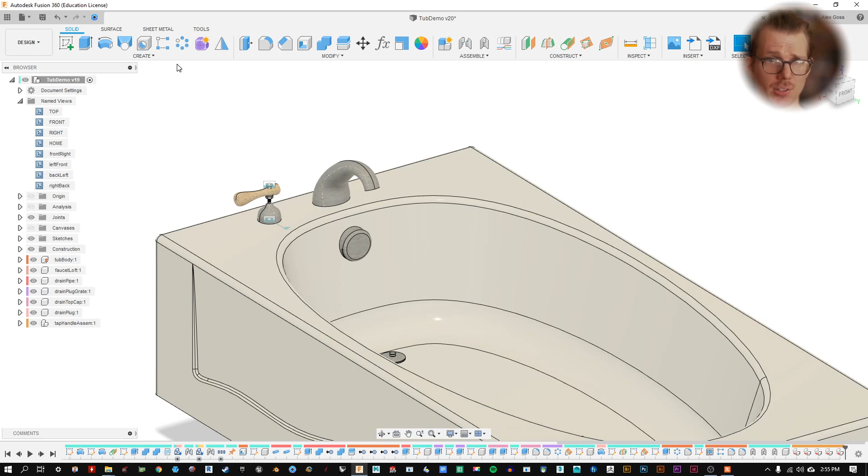Stay with me. It's going to be kind of like what we did with our cutouts here. Instead of mirroring it, we did a circular pattern around a central axis. So let's try that: circular pattern, type is components, select our tap handle assembly. Let's just do it the same way we did it with our side cutout feature. And I'm starting to think this isn't going to work out so well. This could be a conceptual tub where you have to run to either side of the tub to grab the hot water or cold water.

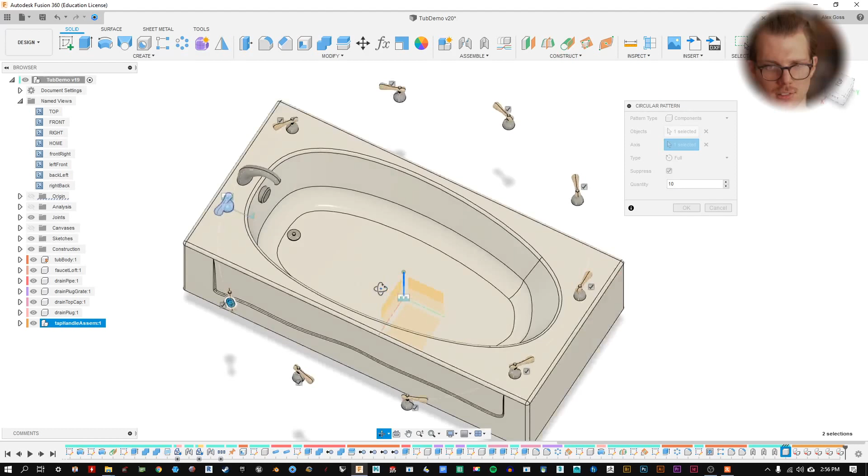But it looks like no matter how many we add, we're really just not getting an equidistant mirror between this and that. So what this means is we're going to have to change our pivot point, our axis of rotation that we're rotating around. This is kind of a beautiful thing, though. I kind of don't want to get rid of this now. Let's hit cancel, though. So let's establish the axis of rotation that we want for our tap handles relative to the tub.

So let's take this faucet and just hide it for the moment. Let's look at the top. And what I want to do is start a sketch on top of the tub. It could really be on any plane that's parallel to this plane, but we're starting a sketch, and I'm going to click on Create, Project Include, or P on the keyboard. And I'm going to click on our selection filter, just the specified entity, select this bottom edge of our bell shape, click OK. And I'm going to hide our tap handle assembly.

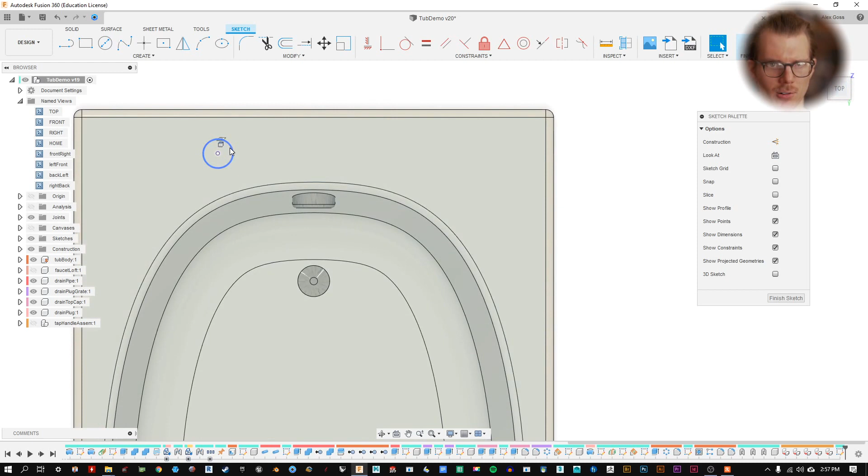And what we want to do is we want to mirror this shape over to this side. So let's find our origin, and let's take this and just draw a line all the way to the top, make that construction geometry. Selecting it, select construction. And now we're going to, with our sketch active, go to Create, Mirror. And let's select one object. That's going to be the circle. And our mirror line over here, we're going to mirror that sketch to the other side. And click OK.

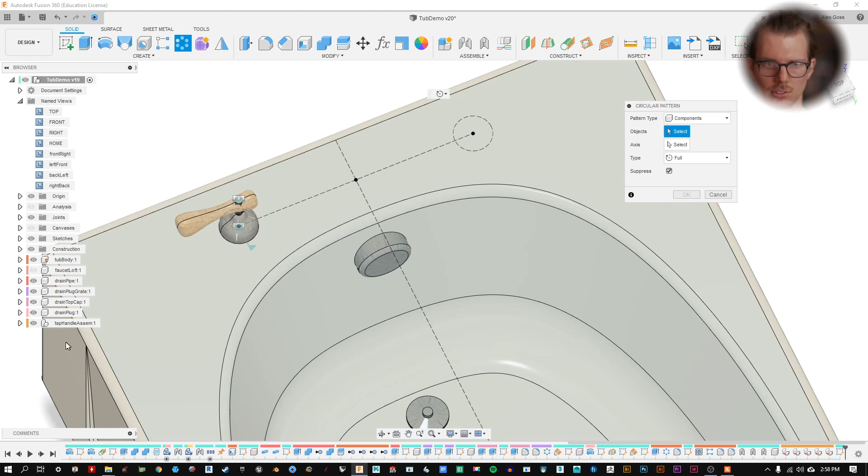Okay, all of this really, we can make construction geometry. Oops. Now we're going to take a line between these 2 points. That's all there is. And I'm going to make a point at this intersection. Okay, so we've established our pivot point. So let's bring our tap handle assembly back, and let's see if we can get away with this. So mirror plane, or excuse me, we're not doing a mirror, we're doing a circular pattern, that's right. Select component, tap handle assembly, our axis. It's unfortunately not going to let us select that point as an axis. It's going to take either of these lines, which again is looking very strange.

So unfortunately, we need to make a new plane here. Let's go to Construct, Plane at Angle. You can select here, or actually we don't need a new plane. Let's take our mid plane, construction, long mid plane, create new sketch. I pre-selected that mid plane and then went to create new sketch. So we should be drawing along this mirror line. L on the keyboard, start a new line. I'm just going to draw a vertical line somewhere. If it's not vertical, we can, with the constraints, click on horizontal/vertical, click on our line, snaps to attention.

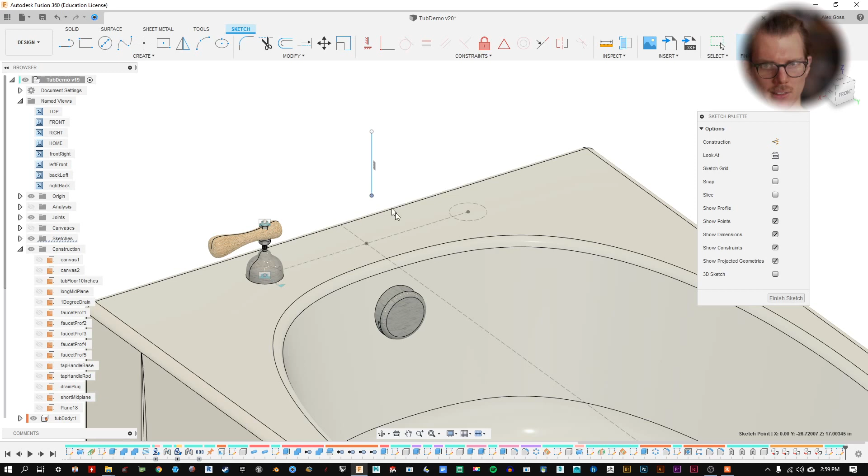I'm going to take this bottom point and drag it. And it's not connecting with that point automatically, so we need to project this point. This is a lot of trouble to mirror this thing. Sometimes it can pay off though. So I'm going to select that point, click OK, and I'm going to click and drag until those snap, or you could go to coincident, click one point, click the other point. Actually, let's not finish that yet. Let's just dimension this so that if something changes, it doesn't end up in the sky or going the other direction. Let's call that 5 inches, just a random number, it was not important. Let's name this. We've got a lot of sketches we haven't named recently. Let's call it rib.

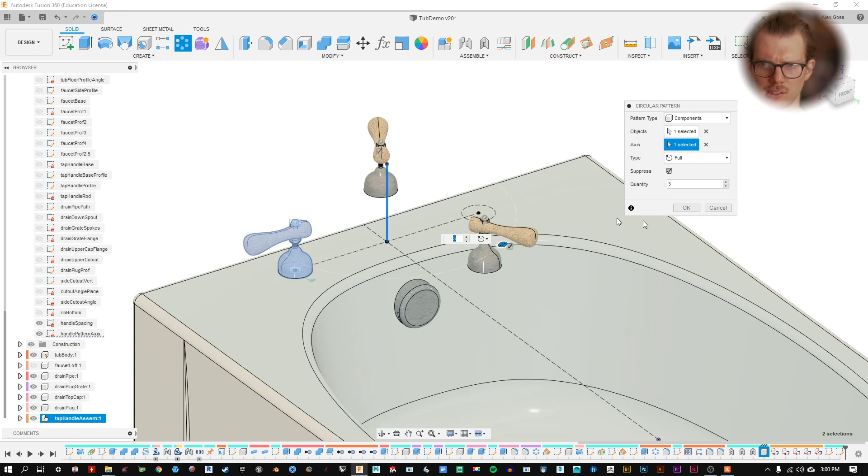So this is the axis we're going to use to pattern. So our circular pattern, one more time, let's go to components, scroll down to find our tap handle assembly with axis. We're going to make this 2 handles, hot and cold. Click OK. Let's hide these sketches, close our sketch drawer, bring our faucet back. So now we've got, this thing still is wiggling, so what we need to do is ground that. Go into our tap handle assembly number 2. It doesn't say mirror anymore, it says number 2. And let's take this base and ground.

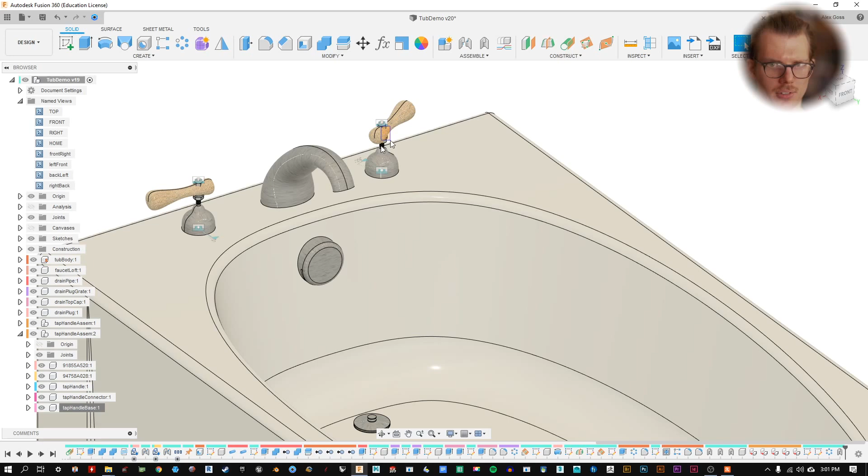Or we could take an as-built joint and select this piece and this piece. And now we should have a rotatable handle on both sides. And all of the pieces are stuck together like glue. Some of these pieces you probably want to think about as just an as-built rigid joint. Okay, that pipe we don't want moving. This faucet we definitely don't want moving. That would be disastrous. This cap we probably don't want moving.

If we go down here, the drain plug we do probably want movable, but we probably want this grate to stay there. So let's see what we can do with this drain plug. Let's do an as-built joint between the drain plug. Let's hide the tub. Let's hide pipe.

And let's make the drain plug and the grate in conversation. Let's turn this into a motion, and let's make this, you could have it a revolute, but I think what we want is, let's try, seems to take some experimentation. Let's try a slider. In this position, let's make it that cylinder. Okay, and there we go.

This might really be rotational and sliding because it's probably actually threaded. As you screw or unscrew, the stopper goes up or down. If we open up motion, we get the option to change that type again, but also the axis. So you could have it slide this way, you could have it slide that way. You could have it slide against the z-axis, or custom.

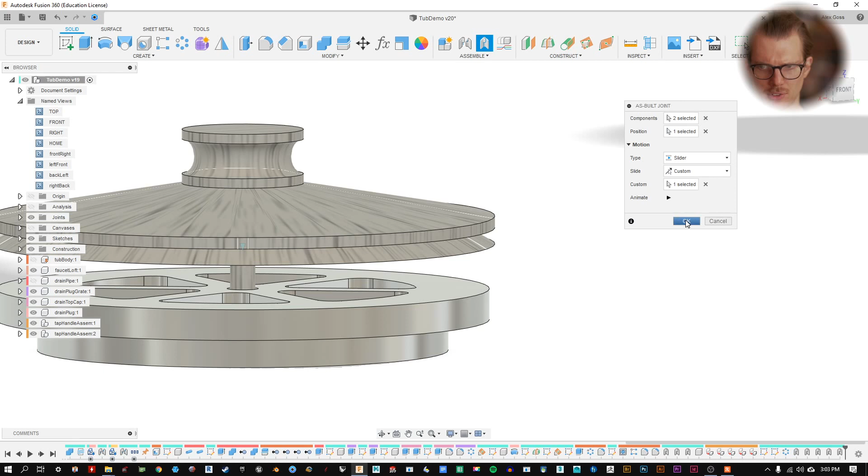We'd have to actually have a line there. Oh, okay, if we select custom, then select that cylinder. I like that more. It's really kind of speaking about the part. You know, I'm a fan of that. So let's click OK. Now, this is kind of unrealistic because it's crashing in there. That's not great. Let's bring our tub body back. I'm going to save this.

And if we go to assembly, we can do something called enable contact sets. I'm going to enable that. And now we can see, let's see, new contact set. Let's make it between these 2 pieces. So now it's keeping me from pushing that any further down, but I can raise it all the way up. So contact set is actually Fusion detecting if there's collision between objects.

Now this is working pretty well here because it's really just 2 things that it's calculating the interference between. I can hear my computer's fan kind of going, even for this simple kind of relationship between these 2. But a contact set is just looking for collisions, and you can make many of them, you can name them, you can turn them on and off. I'm just going to disable that contact because we want to do this a different way.

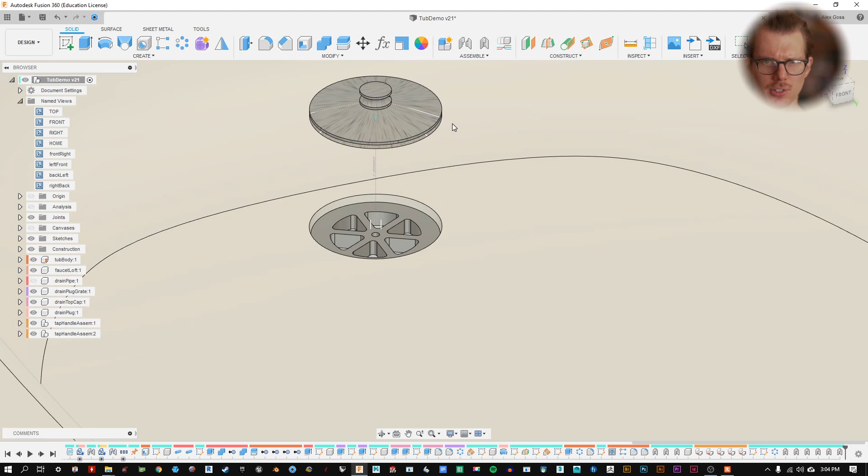Let's find that joint. And you know what, we could even make this a sub-assembly. We can still do that afterwards. And let's come find that. It's the slider. And we know it's that one because if we click on it, it highlights in blue where it actually is on the drawing. Let's right click and go to Edit Joint Limits. So this animate, this is going to show us how far it can go up and down. Let's give it some dimensions.

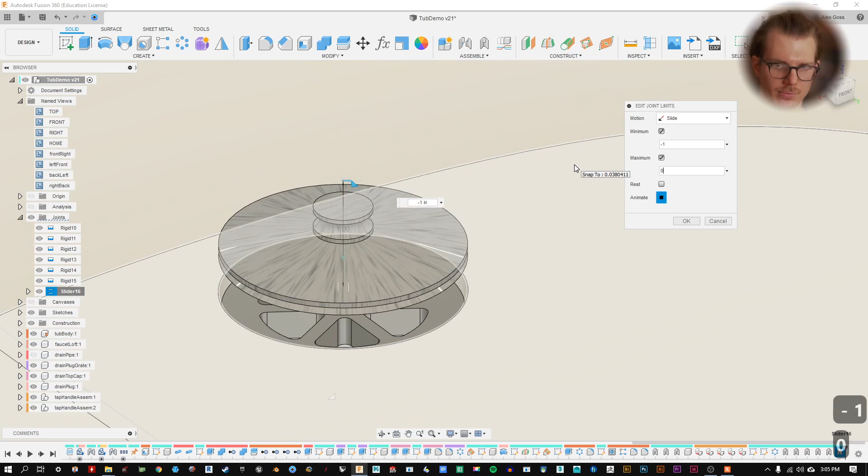So right now it looks like it can go down, it can't go any farther up. Maximum. Let's just start with some dimensions and see what happens. So it looks like if we make these the same value, it can't go anywhere. So I'm just kind of plugging some numbers in and seeing what happens. It looks like the maximum is, if I set that to 0, it's going to keep it from going too far down, but maybe this is too far up.

If we make this a positive number. So yeah, for some reason this is negative. It's kind of weird, but let's make that smaller. Okay, that's kind of cute. There it is, closed, open, closed, open. 0 is where we kind of built it, the construction plane there. And I think we have a fully locked down sketch. All the components have some kind of joint. They have some kind of connection to each other.

Super cool. We did a lot of different things today. We made some kind of beautification with some interesting construction geometry to make that happen, to keep smooth edges. You know, you could also try other things besides an extrude. It was kind of a simple way to do it. You could try lofting. You could try some surfacing. We haven't talked about surfacing yet, but you can create some complex forms.

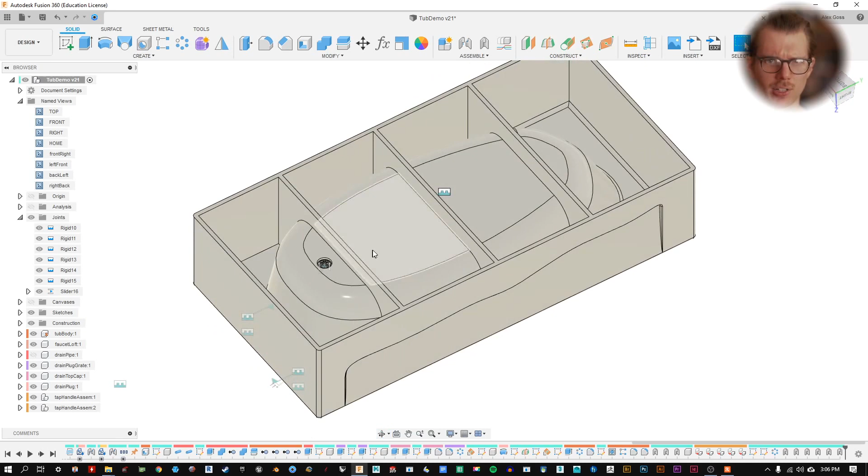And then we made some reinforcement, some ribs down here. And then we worked on some mechanical joints and had Fusion translate those mechanical joints through a sub-assembly as we patterned it rather than mirrored it to have those move through that pattern.

Okay, next Monday, I think we're going to finish this up. Let's do some fun, kind of weird stuff. Let's think about the water that's coming in here. We'll maybe try some sculpting. And then let's talk about rendering. Let's talk about making this thing more photorealistic with the rendering workspace. And we can talk about doing that on your computer and leveraging the cloud that Fusion offers students and educators, the computing power on another machine somewhere in the world.